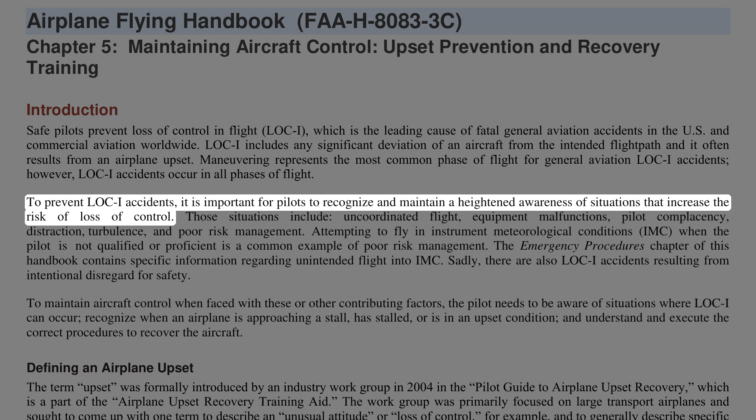To prevent LOCI accidents, it is important for pilots to recognize and maintain a heightened awareness of situations that increase the risk of loss of control. Those situations include uncoordinated flight, equipment malfunctions, pilot complacency, distraction, turbulence, and poor risk management. Attempting to fly in instrument meteorological conditions, IMC, when the pilot is not qualified or proficient is a common example of poor risk management. The Emergency Procedures chapter of this handbook contains specific information regarding unintended flight into IMC. Sadly, there are also LOCI accidents resulting from intentional disregard for safety.

To maintain aircraft control when faced with these or other contributing factors, the pilot needs to be aware of situations where LOCI can occur, recognize when an airplane is approaching a stall, has stalled, or is in an upset condition, and understand and execute the correct procedures to recover the aircraft.

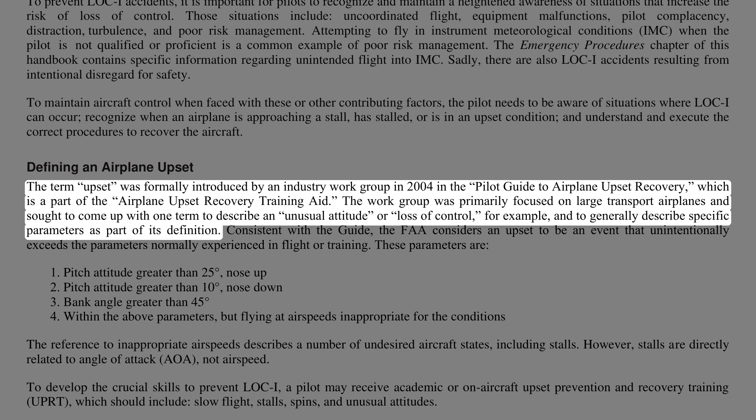Defining an airplane upset. The term upset was formally introduced by an industry workgroup in 2004 in the Pilot Guide to Airplane Upset Recovery, which is part of the Airplane Upset Recovery Training Aid. The workgroup was primarily focused on large transport airplanes and sought to come up with one term to describe an unusual attitude, or loss of control, for example, and to generally describe specific parameters as part of its definition.

Consistent with the guide, the FAA considers an upset to be an event that unintentionally exceeds the parameters normally experienced in flight or training. These parameters are pitch attitude greater than 25 degrees nose up, pitch attitude greater than 10 degrees nose down, bank angle greater than 45 degrees, or within the above parameters but flying at airspeeds inappropriate for the conditions. The reference to inappropriate airspeeds describes a number of undesired aircraft states, including stalls. However, stalls are directly related to angle of attack, AOA, not airspeed.

To develop the crucial skills to prevent LOCI, a pilot may receive academic or on-aircraft upset prevention and recovery training, UPRT, which should include slow flight, stalls, spins, and unusual attitudes. Upset training places considerable emphasis on understanding and preventing an upset, so a pilot avoids such a situation. If an upset does occur, upset training also reinforces proper recovery techniques.

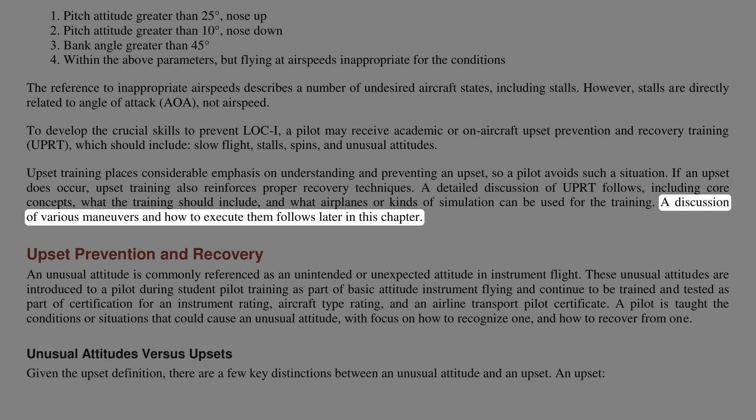A detailed discussion of UPRT follows, including core concepts, what the training should include, and what airplanes or kinds of simulation can be used for the training. A discussion of various maneuvers and how to execute them follows later in this chapter.

Upset prevention and recovery. An unusual attitude is commonly referenced as an unintended or unexpected attitude in instrument flight. These unusual attitudes are introduced to a pilot during student pilot training as part of basic attitude instrument flying and continue to be trained and tested as part of certification for an instrument rating, aircraft type rating, and an airline transport pilot certificate. A pilot is taught the conditions or situations that could cause an unusual attitude, with focus on how to recognize one, and how to recover from one.

Unusual attitudes versus upsets. Given the upset definition, there are a few key distinctions between an unusual attitude and an upset. An upset includes stall events, includes overspeeds or other inappropriate speeds for a given flight condition, and has defined parameters. For example, for training purposes, an instructor could place the aircraft in a 30 degree bank with a nose-up pitch attitude of 15 degrees and ask the student to recover, and that would be considered an unusual attitude, but would not meet the upset parameters.

Unusual attitude training centers on unintentional situations that may lead to a startle effect. For example, during unusual attitude training, the pilot is often directed to close their eyes, and any element of surprise disappears. The top 4 causal and contributing factors that have led to an upset and resulted in LOCI accidents are environmental factors, mechanical factors, human factors, and stall-related factors.

Environmental factors: turbulence, or a large variation in wind velocity over a short distance, can cause upset and LOCI. Maintain awareness of conditions that can lead to various types of turbulence, such as clear air turbulence, mountain waves, wind shear, and thunderstorms or microbursts.

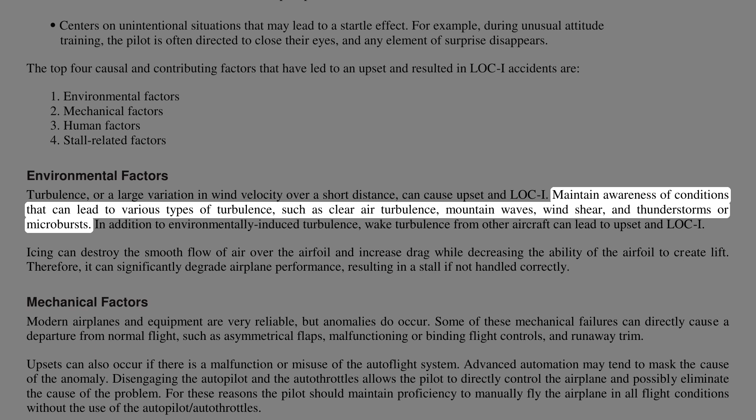In addition to environmentally induced turbulence, wake turbulence from other aircraft can lead to upset and LOCI.

Icing can destroy the smooth flow of air over the airfoil and increase drag while decreasing the ability of the airfoil to create lift. Therefore, it can significantly degrade airplane performance, resulting in a stall if not handled correctly.

Mechanical factors. Modern airplanes and equipment are very reliable, but anomalies do occur. Some of these mechanical failures can directly cause a departure from normal flight, such as asymmetrical flaps, malfunctioning or binding flight controls, and runaway trim.

Upsets can also occur if there is a malfunction or misuse of the autoflight system. Advanced automation may tend to mask the cause of the anomaly. Disengaging the autopilot and the autothrottles allows the pilot to directly control the airplane and possibly eliminate the cause of the problem. For these reasons, the pilot should maintain proficiency to manually fly the airplane in all flight conditions without the use of the autopilot or autothrottles.

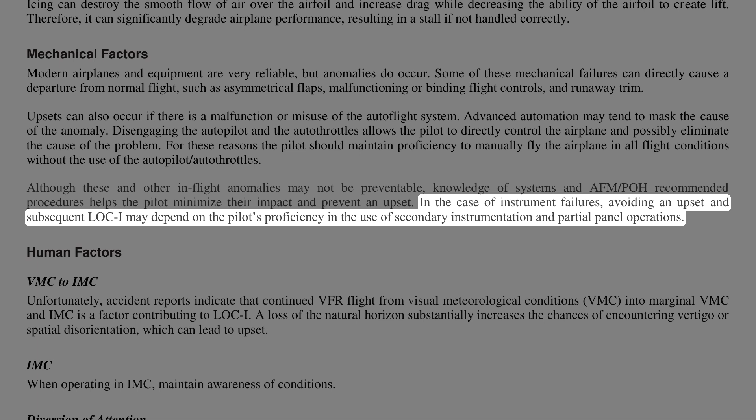Although these and other in-flight anomalies may not be preventable, knowledge of systems and AFM/POH recommended procedures helps the pilot minimize their impact and prevent an upset. In the case of instrument failures, avoiding an upset and subsequent loss of control may depend on the pilot's proficiency in the use of secondary instrumentation and partial panel operations.

Human factors. VMC to IMC. Unfortunately, accident reports indicate that continued VFR flight from visual meteorological conditions, VMC, into marginal VMC and IMC is a factor contributing to loss of control. A loss of the natural horizon substantially increases the chances of encountering vertigo or spatial disorientation, which can lead to upset.

IMC. When operating in IMC, maintain awareness of conditions. Diversion of attention. In addition to its direct impact, an in-flight anomaly or malfunction can also lead to an upset if it diverts the pilot's attention from basic airplane control responsibilities.

Failing to monitor the automated systems, over-reliance on those systems, or incomplete knowledge and experience with those systems can lead to an upset. Diversion of attention can also occur simply from the pilot's efforts to set avionics or navigation equipment while flying the airplane. Task saturation.

The margin of safety is the difference between task requirements and pilot capabilities. An upset and eventual loss of control can occur whenever requirements exceed capabilities. For example, an airplane upset event that requires rolling an airplane from a near inverted to an upright orientation may demand piloting skills beyond those learned during primary training.

In another example, a fatigued pilot who inadvertently encounters IMC at night coupled with a vacuum pump failure, or a pilot who fails to engage pitot heat while flying in IMC, could become disoriented and lose control of the airplane due to the demands of extended and unpracticed partial panel flight.

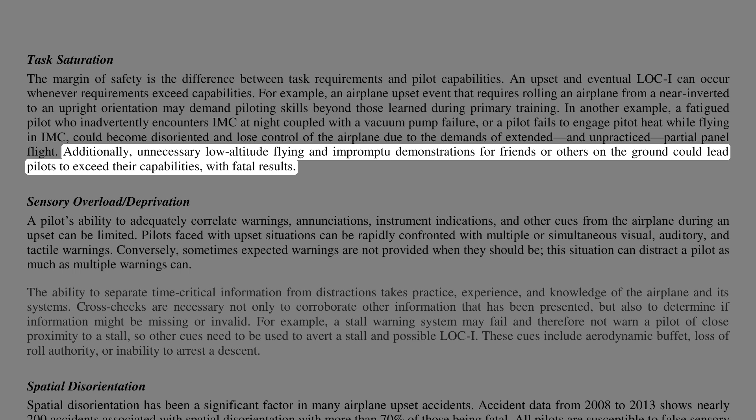Additionally, unnecessary low-altitude flying and impromptu demonstrations for friends or others on the ground could lead pilots to exceed their capabilities, with fatal results. Sensory overload, deprivation.

A pilot's ability to adequately correlate warnings, annunciations, instrument indications, and other cues from the airplane during an upset can be limited. Pilots faced with upset situations can be rapidly confronted with multiple or simultaneous visual, auditory, and tactile warnings. Conversely, sometimes expected warnings are not provided when they should be. This situation can distract a pilot as much as multiple warnings can.

The ability to separate time-critical information from distractions takes practice, experience, and knowledge of the airplane and its systems. Cross-checks are necessary not only to corroborate other information that has been presented, but also to determine if information might be missing or invalid. For example, a stall warning system may fail and therefore not warn a pilot of close proximity to a stall.

So other cues need to be used to avert a stall and possible loss of control. These cues include aerodynamic buffet, loss of roll authority, or inability to arrest a descent.

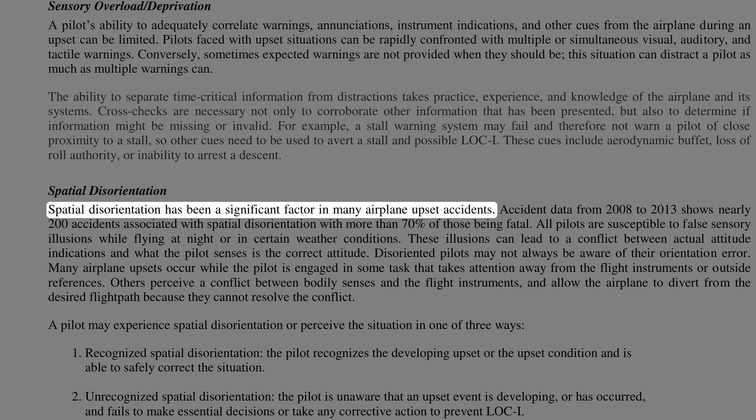Spatial disorientation. Spatial disorientation has been a significant factor in many airplane upset accidents. Accident data from 2008 to 2013 shows nearly 200 accidents associated with spatial disorientation, with more than 70% of those being fatal. All pilots are susceptible to false sensory illusions while flying at night or in certain weather conditions.

These illusions can lead to a conflict between actual attitude indications and what the pilot senses is the correct attitude. Disoriented pilots may not always be aware of their orientation error. Many airplane upsets occur while the pilot is engaged in some task that takes attention away from the flight instruments or outside references. Others perceive a conflict between bodily senses and the flight instruments, and allow the airplane to divert from the desired flight path because they cannot resolve the conflict.

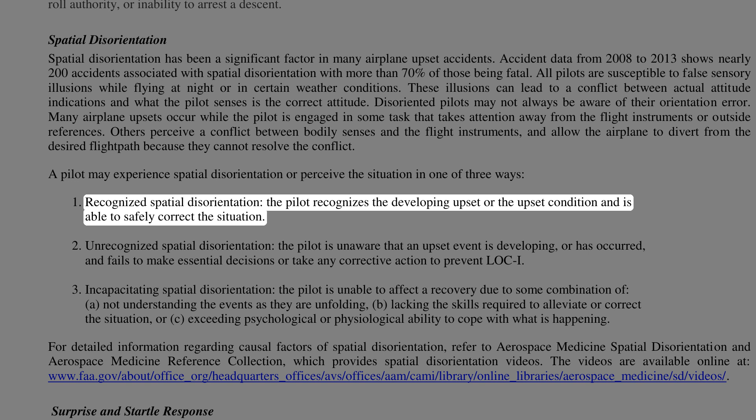A pilot may experience spatial disorientation or perceive the situation in one of three ways. Recognized spatial disorientation: the pilot recognizes the developing upset or the upset condition and is able to safely correct the situation.

Unrecognized spatial disorientation: the pilot is unaware that an upset event is developing or has occurred, and fails to make essential decisions or take any corrective action to prevent loss of control.

Incapacitating spatial disorientation: the pilot is unable to effect a recovery due to some combination of A, not understanding the events as they are unfolding; B, lacking the skills required to alleviate or correct the situation; or C, exceeding psychological or physiological ability to cope with what is happening.

For detailed information regarding causal factors of spatial disorientation, refer to Aerospace Medicine Spatial Disorientation and the Aerospace Medicine Reference Collection, which provides spatial disorientation videos available online.

Surprise and startle response. Surprise is an unexpected event that violates a pilot's expectations and can affect the mental processes used to respond to the event. Startle is an uncontrollable, automatic muscle reflex, raised heart rate, blood pressure, etc., elicited by exposure to a sudden, intense event that violates a pilot's expectations.

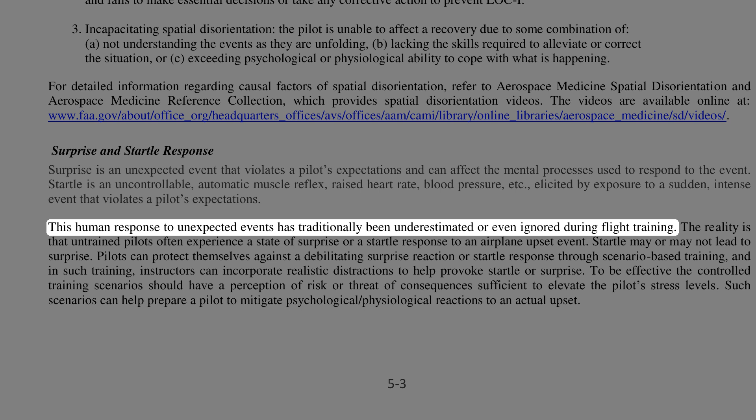This human response to unexpected events has traditionally been underestimated or even ignored during flight training. The reality is that untrained pilots often experience a state of surprise or a startle response to an airplane upset event. Startle may or may not lead to surprise.

Pilots can protect themselves against a debilitating surprise reaction or startle response through scenario-based training, and in such training, instructors can incorporate realistic distractions to help provoke startle or surprise. To be effective, the controlled training scenarios should have a perception of risk or threat of consequences sufficient to elevate the pilot's stress levels. Such scenarios can help prepare a pilot to mitigate psychological and physiological reactions to an actual upset.

Upset prevention and recovery training, UPRT. Upsets are not intentional flight maneuvers, except in maneuver-based training, therefore they are often unexpected.

The reaction of an inexperienced or inadequately trained pilot to an unexpected abnormal flight attitude is usually instinctive rather than intelligent and deliberate. Such a pilot often reacts with abrupt muscular effort, which is without purpose and even hazardous in turbulent conditions, at excessive speeds, or at low altitudes.

Without proper upset recovery training on interpretation and airplane control, the pilot can quickly aggravate an abnormal flight attitude into a potentially fatal loss of control accident.

Consequently, UPRT is intended to focus education and training on the prevention of upsets, and on recovering from these events if they occur. Figure 5-1.

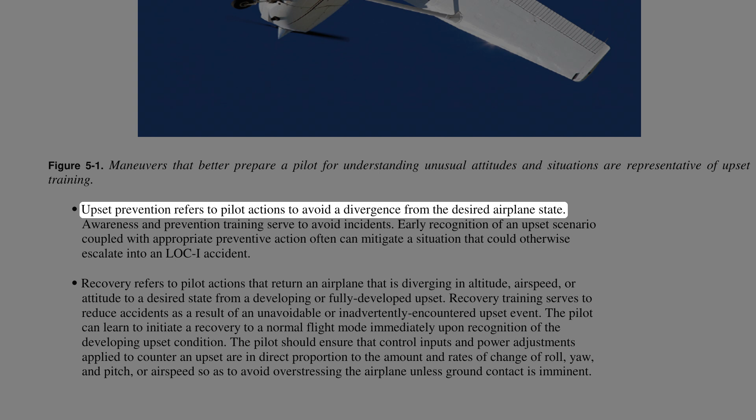Upset prevention refers to pilot actions to avoid a divergence from the desired airplane state. Awareness and prevention training serve to avoid incidents. Early recognition of an upset scenario coupled with appropriate preventive action often can mitigate a situation that could otherwise escalate into an LOC-I accident.

Recovery refers to pilot actions that return an airplane that is diverging in altitude, airspeed, or attitude to a desired state from a developing or fully developed upset. Recovery training serves to reduce accidents as a result of an unavoidable or inadvertently encountered upset event.

The pilot can learn to initiate a recovery to a normal flight mode immediately upon recognition of the developing upset condition. The pilot should ensure that control inputs and power adjustments applied to counter an upset are in direct proportion to the amount and rates of change of roll, yaw, and pitch, or airspeed, so as to avoid overstressing the airplane unless ground contact is imminent.

UPRT training core concepts: airplane upsets are by nature time-critical events. They can also place pilots in unusual and unfamiliar attitudes that sometimes require counterintuitive control movements.

Upsets have the potential to put a pilot into a life-threatening situation compounded by panic, diminished mental capacity, and potentially incapacitating spatial disorientation. Real-world upset situations often provide very little time to react, but exposure to such events during training can reduce surprise and mitigate confusion during an actual unexpected upset.

The goal is to equip the pilot to promptly recognize an escalating threat pattern or sensory overload and quickly identify and correct an impending upset.

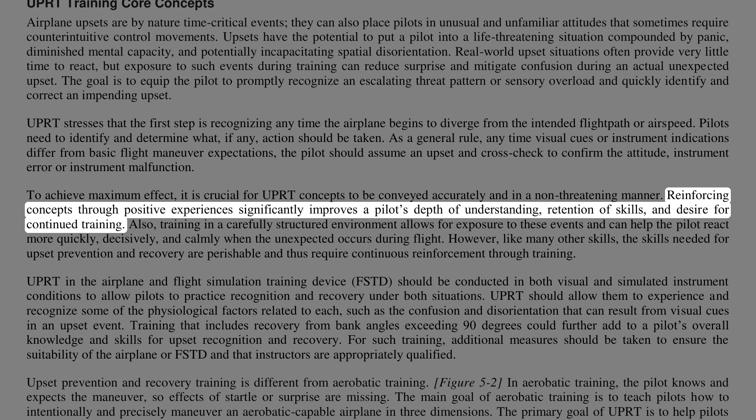Reinforcing concepts through positive experiences significantly improves a pilot's depth of understanding, retention of skills, and desire for continued training. Also, training in a carefully structured environment allows for exposure to these events and can help the pilot react more quickly, decisively, and calmly when the unexpected occurs during flight.

However, like many other skills, the skills needed for upset prevention and recovery are perishable and thus require continuous reinforcement through training. UPRT in the airplane and Flight Simulation Training Device (FSTD) should be conducted in both visual and simulated instrument conditions to allow pilots to practice recognition and recovery under both situations.

UPRT should allow them to experience and recognize some of the physiological factors related to each, such as the confusion and disorientation that can result from visual cues in an upset event. Training that includes recovery from bank angles exceeding 90 degrees could further add to a pilot's overall knowledge and skills for upset recognition and recovery. For such training, additional measures should be taken to ensure the suitability of the airplane or FSTD and that instructors are appropriately qualified. Upset prevention and recovery training is different from aerobatic training.

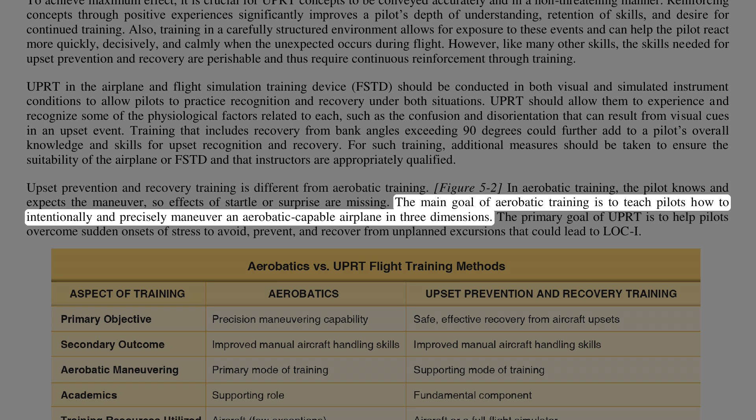Figure 5-2. In aerobatic training, the pilot knows and expects the maneuver, so effects of startle or surprise are missing. The main goal of aerobatic training is to teach pilots how to intentionally and precisely maneuver an aerobatic-capable airplane in 3 dimensions. The primary goal of UPRT is to help pilots overcome sudden onsets of stress to avoid, prevent, and recover from unplanned excursions that could lead to loss of control.

Comprehensive UPRT builds on 3 mutually supportive components: academics, airplane-based training, and, typically at the transport category type rating training level, use of FSTDs. Each has unique benefits and limitations, but when implemented cohesively and comprehensively throughout a pilot's career, the components can offer maximum preparation for upset awareness, prevention, recognition, and recovery.

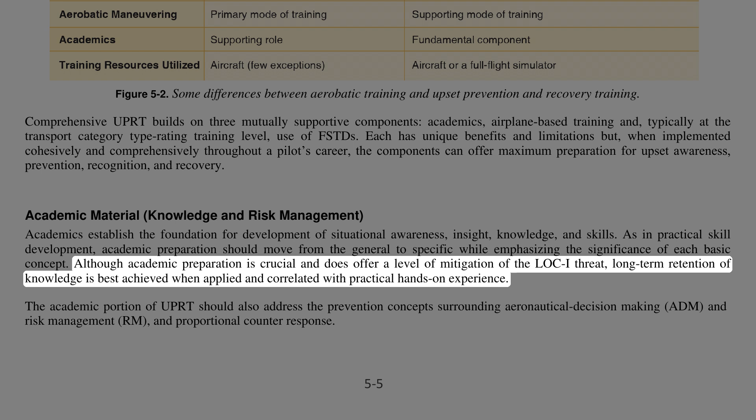Academic material, knowledge and risk management. Academics establish the foundation for development of situational awareness, insight, knowledge, and skills. As in practical skill development, academic preparation should move from the general to specific while emphasizing the significance of each basic concept. Although academic preparation is crucial and does offer a level of mitigation of the loss-of-control threat, long-term retention of knowledge is best achieved when applied and correlated with practical hands-on experience.

The academic portion of UPRT should also address the prevention concepts surrounding aeronautical decision-making, risk management, and proportional counter-response. Prevention through ADM and risk management: this element of prevention routinely occurs on a time scale of minutes or hours, revolving around the concept of effective ADM and risk management through analysis, awareness, resource management, and interrupting the error chain through basic airmanship skills and sound judgment. For instance, imagine a situation in which a pilot assesses conditions at an airport prior to descent and recognizes those conditions as being too severe to safely land the airplane.

Using situational awareness to avert a potentially threatening flight condition is an example of prevention of a loss-of-control situation through effective risk management. Pilots should evaluate the circumstances for each flight, including the equipment and environment, looking specifically for scenarios that may require a higher level of risk management. These include situations that could result in low-altitude maneuvering, steep turns in the pattern, uncoordinated flight, or increased load factors.

Another part of ADM is crew resource management (CRM), or single pilot resource management (SRM). Both are relevant to the UPRT environment. When available, a coordinated crew response to potential and developing upsets can provide added benefits such as increased situational awareness, mutual support, and an improved margin of safety. Since an untrained crew member can be the most unpredictable element in an upset scenario, initial UPRT for crew operations should be mastered individually before being integrated into a multi-crew CRM environment.

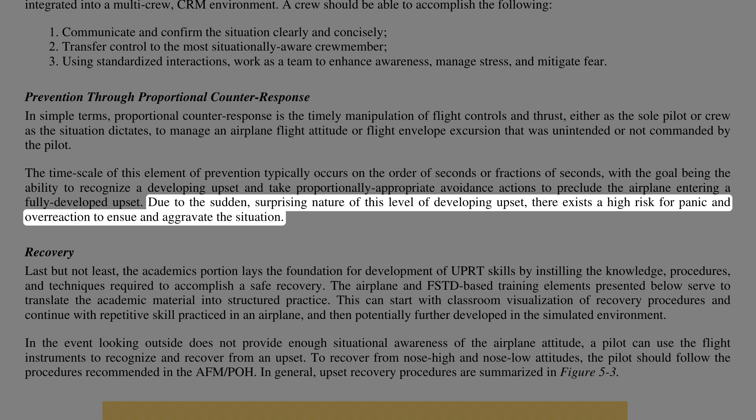Recovery. Last but not least, the academics portion lays the foundation for development of UPRT skills by instilling the knowledge, procedures, and techniques required to accomplish a safe recovery. The airplane and FSTD-based training elements presented below serve to translate the academic material into structured practice.

This can start with classroom visualization of recovery procedures and continue with repetitive skill practiced in an airplane, and then potentially further developed in the simulated environment. In the event looking outside does not provide enough situational awareness of the airplane attitude, a pilot can use the flight instruments to recognize and recover from an upset.

To recover from nose-high and nose-low attitudes, the pilot should follow the procedures recommended in the AFM POH. In general, upset recovery procedures are summarized in Figure 5-3.

Common errors associated with upset recoveries include: incorrect assessment of what kind of upset the airplane is in, failure to disconnect the wing leveler or autopilot, failure to unload the airplane if necessary, failure to roll in the correct direction, and inappropriate management of the airspeed during the recovery. Roles of FSTDs and airplanes in UPRT.

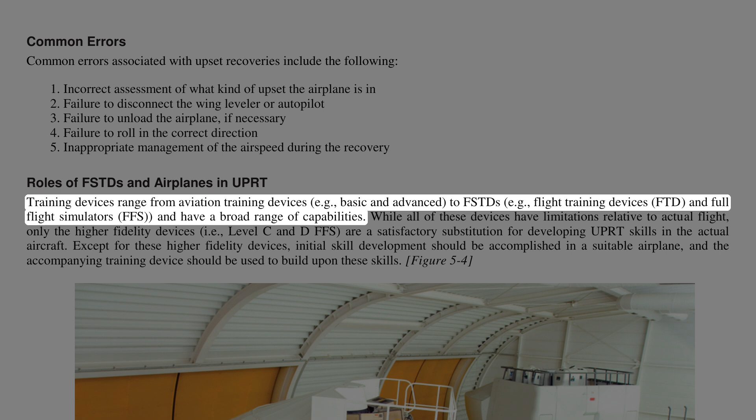Training devices range from aviation training devices, e.g., basic and advanced, to FSTDs, e.g., flight training devices (FTD) and full flight simulators (FFS), and have a broad range of capabilities. While all of these devices have limitations relative to actual flight, only the higher fidelity devices, i.e., Level C and D FFS, are a satisfactory substitution for developing UPRT skills in the actual aircraft.

Except for these higher fidelity devices, initial skill development should be accomplished in a suitable airplane, and the accompanying training device should be used to build upon these skills.

Figure 5-4, Airplane-based UPRT. Ultimately, the more realistic the training scenario, the more indelible the learning experience. Although creating a visual scene of a 110 degree banked attitude with the nose 30 degrees below the horizon may not be technically difficult in a modern simulator, the learning achieved while viewing that scene from the security of the simulator is not as complete as when viewing the same scene in an airplane.

Maximum learning is achieved when the pilot is placed in the controlled, yet adrenaline-enhanced, environment of upsets experienced while in flight. For these reasons, airplane-based UPRT improves a pilot's ability to overcome fear in an airplane upset event.

However, airplane-based UPRT does have limitations. The level of upset training possible may be limited by the maneuvers approved for the particular airplane, as well as by the flight instructor's own UPRT capabilities.

For instance, UPRT conducted in the normal category by a typical flight instructor will necessarily be different from UPRT conducted in the aerobatic category by a flight instructor with expertise in aerobatics.

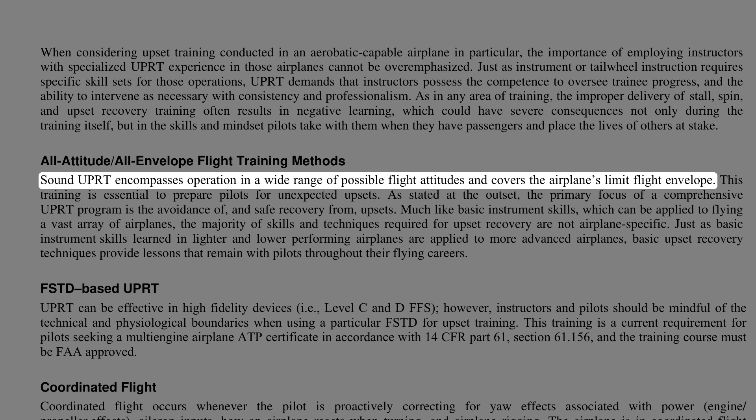All attitude, all envelope flight training methods. Sound UPRT encompasses operation in a wide range of possible flight attitudes and covers the airplane's limit flight envelope. This training is essential to prepare pilots for unexpected upsets.

As stated at the outset, the primary focus of a comprehensive UPRT program is the avoidance of, and safe recovery from, upsets. Much like basic instrument skills, which can be applied to flying a vast array of airplanes, the majority of skills and techniques required for upset recovery are not airplane-specific.

Just as basic instrument skills learned in lighter and lower-performing airplanes are applied to more advanced airplanes, basic upset recovery techniques provide lessons that remain with pilots throughout their flying careers.

FSTD-based UPRT. UPRT can be effective in high-fidelity devices, i.e., Level C and D FFS. However, instructors and pilots should be mindful of the technical and physiological boundaries when using a particular FSTD for upset training.

This training is a current requirement for pilots seeking a multi-engine airplane ATP certificate in accordance with 14 CFR Part 61, Section 61.156, and the training course must be FAA approved.

Coordinated flight occurs whenever the pilot is proactively correcting for yaw effects associated with power, engine, and propeller effects, aileron inputs, how an airplane reacts when turning, and airplane rigging.

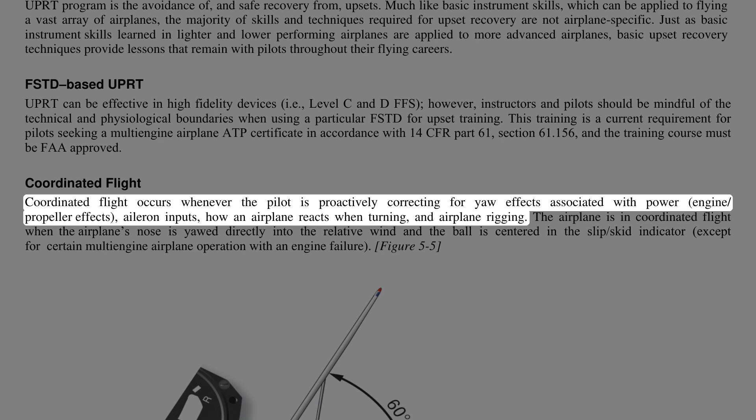The airplane is in coordinated flight when the airplane's nose is yawed directly into the relative wind and the ball is centered in the slip/skid indicator, except for certain multi-engine airplane operations with an engine failure.

Figure 5-5, Angle of Attack. The angle of attack, AOA, is the angle at which the chord of the wing meets the relative wind. The chord is a straight line from the leading edge to the trailing edge.

At low angles of attack, the airflow over the top of the wing flows smoothly and produces lift with a relatively small amount of drag. As the AOA increases, lift as well as drag increases.

However, above a wing's critical AOA, the flow of air separates from the upper surface and backfills, burbles, and eddies, which reduces lift and increases drag. This condition is a stall, which can lead to loss of control if the AOA is not reduced.

It is important for the pilot to understand that a stall is the result of exceeding the critical AOA, not of insufficient airspeed. The term stalling speed can be misleading, as this speed is often discussed when assuming 1G flight at a particular weight and configuration.

Increased load factor directly affects stall speed, as well as do other factors such as gross weight, center of gravity, and flap setting. Therefore, it is possible to stall the wing at any airspeed, at any flight attitude, and at any power setting. For example, if a pilot maintains airspeed and rolls into a coordinated, level 60 degree banked turn,

the load factor is 2G, and the airplane will stall at a speed that is 41% higher than the 1G stall speed. In that 2G level turn, the pilot has to increase AOA to increase the lift required to maintain altitude. At this condition, the pilot is closer to the critical AOA than during level flight and therefore closer to the higher stalling speed.

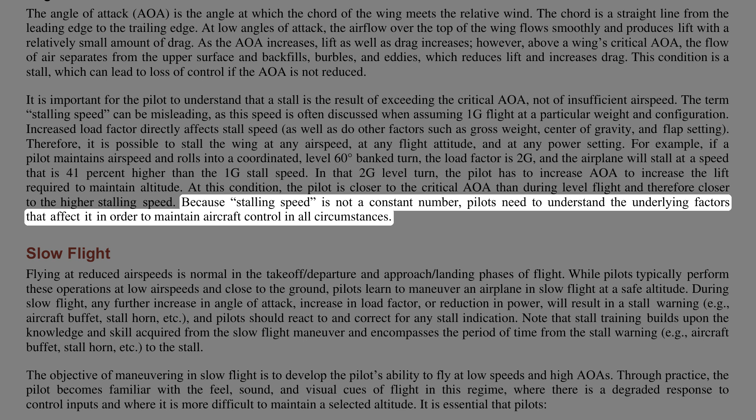Slow flight. Flying at reduced airspeeds is normal in the takeoff, departure and approach, landing phases of flight. While pilots typically perform these operations at low airspeeds and close to the ground, pilots learn to maneuver an airplane in slow flight at a safe altitude.

During slow flight, any further increase in angle of attack, increase in load factor, or reduction in power will result in a stall warning, e.g., aircraft buffet, stall horn, etc. And pilots should react to and correct for any stall indication.

Note that stall training builds upon the knowledge and skill acquired from the slow flight maneuver and encompasses the period of time from the stall warning, e.g., aircraft buffet, stall horn, etc., to the stall. The objective of maneuvering in slow flight is to develop the pilot's ability to fly at low speeds and high AOAs.

Through practice, the pilot becomes familiar with the feel, sound, and visual cues of flight in this regime, where there is a degraded response to control inputs and where it is more difficult to maintain a selected altitude.

It is essential that pilots understand the aerodynamics associated with slow flight in various aircraft configurations and attitudes,

recognize airplane cues in these flight conditions, smoothly manage coordinated flight control inputs while maneuvering without a stall warning, and make prompt appropriate correction should a stall warning occur.

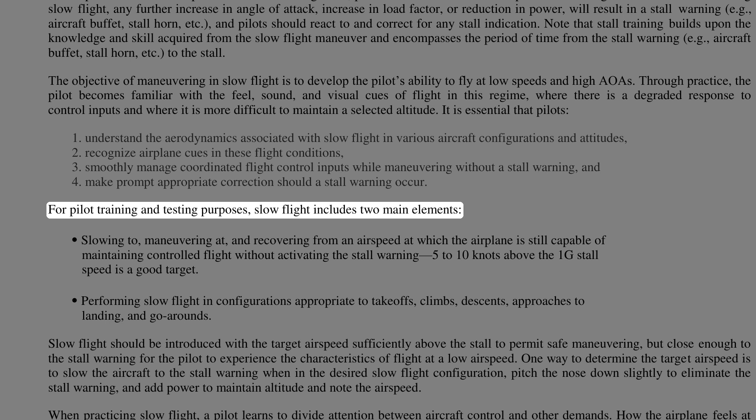For pilot training and testing purposes, slow flight includes two main elements: slowing to, maneuvering at, and recovering from an airspeed at which the airplane is still capable of maintaining controlled flight without activating the stall warning. 5 to 10 knots above the 1G stall speed is a good target.

Performing slow flight in configurations appropriate to takeoffs, climbs, descents, approaches to landing, and go-arounds. Slow flight should be introduced with the target airspeed sufficiently above the stall to permit safe maneuvering, but close enough to the stall warning for the pilot to experience the characteristics of flight at a low airspeed.

One way to determine the target airspeed is to slow the aircraft to the stall warning when in the desired slow flight configuration, pitch the nose down slightly to eliminate the stall warning, and add power to maintain altitude and note the airspeed. When practicing slow flight, a pilot learns to divide attention between aircraft control and other demands.

How the airplane feels at the slower airspeeds demonstrates that as airspeed decreases, control effectiveness decreases. For instance, reducing airspeed from 30 knots to 20 knots above the stalling speed will result in a certain loss of effectiveness of flight control inputs because of less airflow over the control surfaces.

As airspeed is further reduced, the control effectiveness is further reduced, and the reduced airflow over the control surfaces results in larger control movements being required to create the same response. Pilots sometimes refer to the feel of this reduced effectiveness as sloppy or mushy controls.

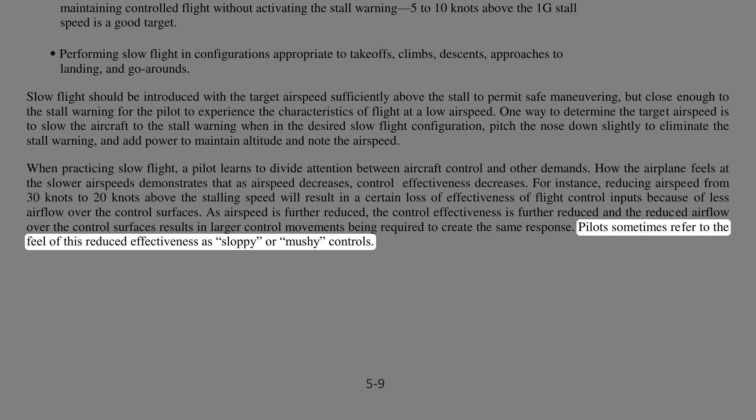When flying above the minimum drag speed, LD max, more power is required to fly even faster. When flying at speeds below LD max, more power is required to fly even slower. Since slow flight will be performed well below LD max, the pilot should be aware that large power inputs or a reduction in AOA will be required to prevent the aircraft from decelerating.

It is important to note that when flying below LD max, or on the backside of the power curve, as the AOA increases toward the critical AOA and the airplane's speed continues to decrease, small changes in pitch control result in disproportionately large changes in induced drag and therefore changes in airspeed. As a result, pitch becomes a more effective control of airspeed when flying below LD max, and power is an effective control of the flight path.

It is also important to note that an airplane flying below LD max exhibits a characteristic known as speed instability, and the airspeed will continue to decay without appropriate pilot action. For example, if the airplane is disturbed by turbulence and the airspeed decreases, the airspeed may continue to decrease without the appropriate pilot action of reducing the AOA or adding power.

Performing the slow flight maneuver. Slow flight training includes slowing the airplane smoothly and promptly from cruising to approach speeds without changes in altitude or heading, while increasing the angle of attack and setting the required power and trim.

Configuration changes, such as extending the landing gear and adding flaps, while maintaining heading and altitude. Turning while maintaining altitude, straight ahead climbs and climbing medium banked, approximately 20 degree turns, and straight ahead power-off gliding descents and descending turns, which represent the takeoff and landing phases of flight.

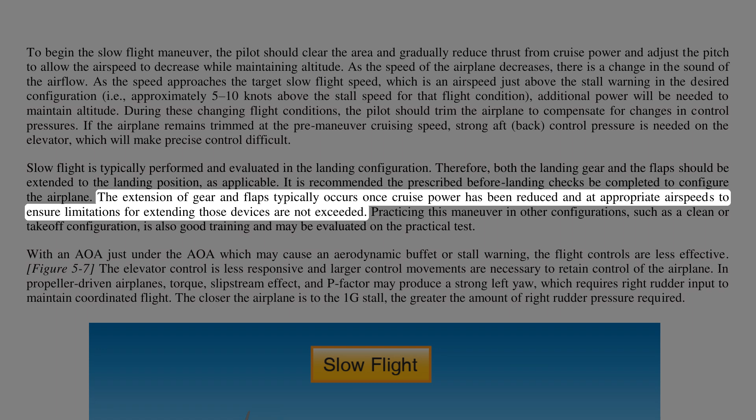Slow flight is typically performed and evaluated in the landing configuration. Therefore, both the landing gear and the flaps should be extended to the landing position, as applicable. It is recommended the prescribed before landing checks be completed to configure the airplane. The extension of gear and flaps typically occurs once cruise power has been reduced and at appropriate airspeeds to ensure limitations for extending those devices are not exceeded.

Practicing this maneuver in other configurations, such as a clean or takeoff configuration, is also good training and may be evaluated on the practical test.

With an AOA just under the AOA which may cause an aerodynamic buffet or stall warning, the flight controls are less effective. Figure 5-7. The elevator control is less responsive and larger control movements are necessary to retain control of the airplane.

In propeller-driven airplanes, torque, slipstream effect, and P-factor may produce a strong left yaw, which requires right rudder input to maintain coordinated flight. The closer the airplane is to the 1G stall, the greater the amount of right rudder pressure required.

Maneuvering in slow flight. When the desired pitch attitude and airspeed have been established in straight and level slow flight, the pilot needs to maintain awareness of outside references and continually cross-check the airplane's instruments to maintain control.

The pilot should note the feel of the flight controls, especially the airspeed changes caused by small pitch adjustments, and the altitude changes caused by power changes. The pilot should practice turns to determine the airplane's controllability characteristics at this low speed. During the turns, it will be necessary to increase power to maintain altitude.

Abrupt or rough control movements during slow flight may result in a stall. For instance, abruptly raising the flaps while in slow flight can cause the plane to stall.

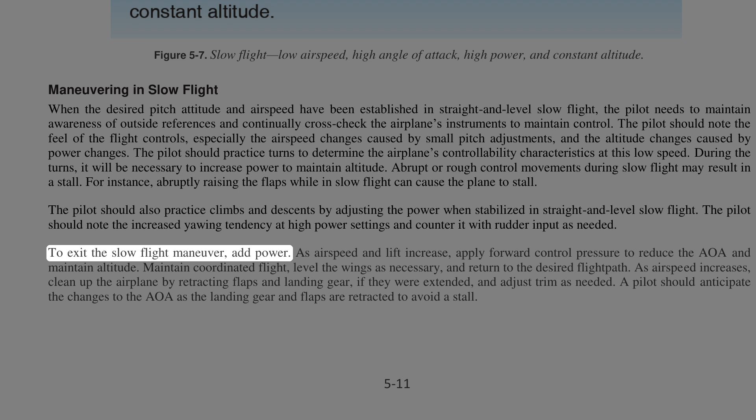As airspeed and lift increase, apply forward control pressure to reduce the AOA and maintain altitude. Maintain coordinated flight, level the wings as necessary, and return to the desired flight path. As airspeed increases, clean up the airplane by retracting flaps and landing gear, if they were extended, and adjust trim

as needed. A pilot should anticipate the changes to the AOA as the landing gear and flaps are retracted to avoid a stall.

Common errors in the performance of slow flight are: failure to adequately clear the area, inadequate back elevator pressure as power is reduced, resulting in altitude loss; excessive back elevator pressure as power is reduced, resulting in a climb followed by rapid reduction in airspeed; insufficient right rudder to compensate for left yaw; fixation on the flight instruments; failure to anticipate changes in AOA as flaps are extended or retracted; inadequate power management; inability to adequately divide attention between airplane control and orientation; failure to properly trim the airplane; failure to respond to a stall warning.

Stalls. A stall is an aerodynamic condition which occurs when smooth airflow over the airplane's wings is disrupted, resulting in loss of lift. Specifically, a stall occurs when the AOA, the angle between the chord line of the wing and the relative wind, exceeds the wing's critical AOA.

It is possible to exceed the critical AOA at any airspeed, at any attitude, and at any power setting. For these reasons, it is important to understand factors and situations that can lead to a stall, and develop proficiency in stall recognition and recovery.

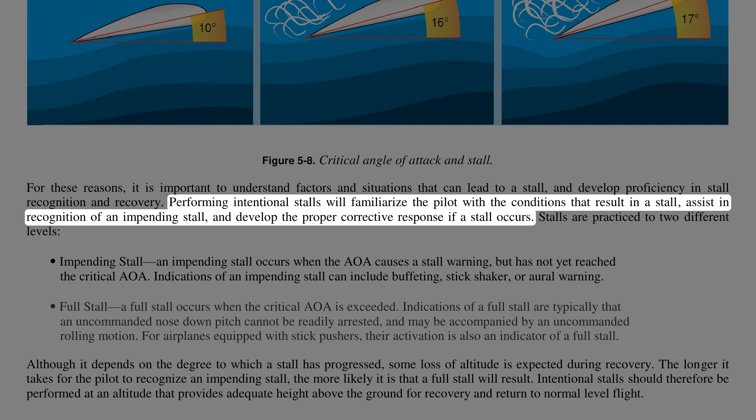Performing intentional stalls will familiarize the pilot with the conditions that result in a stall, assist in recognition of an impending stall, and develop the proper corrective response if a stall occurs. Stalls are practiced to two different levels.

Impending stall. An impending stall occurs when the AOA causes a stall warning, but has not yet reached the critical AOA. Indications of an impending stall can include buffeting, stick shaker, or aural warning.

Full stall. A full stall occurs when the critical AOA is exceeded. Indications of a full stall are typically that an uncommanded nose-down pitch cannot be readily arrested, and may be accompanied by an uncommanded rolling motion. For airplanes equipped with stick pushers, their activation is also an indicator of a full stall.

Although it depends on the degree to which a stall has progressed, some loss of altitude is expected during recovery. The longer it takes for the pilot to recognize an impending stall, the more likely it is that a full stall will result. Intentional stalls should therefore be performed at an altitude that provides adequate height above the ground for recovery and return to normal level flight.

Stall recognition. A pilot should recognize the flight conditions that are conducive to stalls and know how to apply the necessary corrective action. This level of proficiency involves learning to recognize an impending stall by sight, sound, and feel.

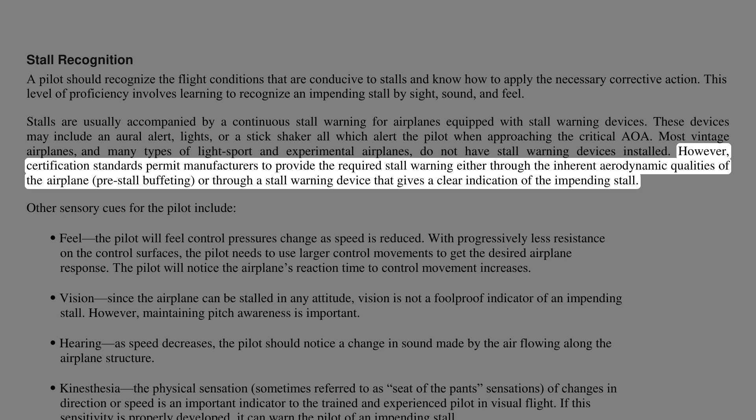Stalls are usually accompanied by a continuous stall warning for airplanes equipped with stall warning devices. These devices may include an aural alert, lights, or a stick shaker, all of which alert the pilot when approaching the critical AOA. Most vintage airplanes, and many types of light sport and experimental airplanes, do not have stall warning devices installed. However, certification standards permit manufacturers to provide the required stall warning either through the inherent aerodynamic qualities of the airplane, pre-stall buffeting, or through a stall warning device that gives a clear indication of the impending stall.

Other sensory cues for the pilot include feel. The pilot will feel control pressures change as speed is reduced. With progressively less resistance on the control surfaces, the pilot needs to use larger control movements to get the desired airplane response. The pilot will notice the airplane's reaction time to control movement increases.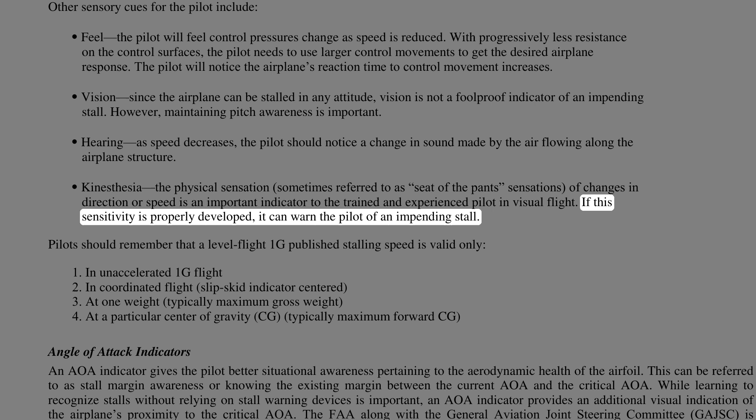Vision. Since the airplane can be stalled in any attitude, vision is not a foolproof indicator of an impending stall. However, maintaining pitch awareness is important. Hearing. As speed decreases, the pilot should notice a change in sound made by the air flowing along the airplane structure. Kinesthesia. The physical sensation, sometimes referred to as seat of the pants sensations of changes in direction or speed, is an important indicator to the trained and experienced pilot in visual flight. If this sensitivity is properly developed, it can warn the pilot of an impending stall.

Pilots should remember that a level flight 1G published stalling speed is valid only in unaccelerated 1G flight, in coordinated flight, with the slip skid indicator centered, at one weight (typically maximum gross weight), at a particular center of gravity, CG (typically maximum forward CG).

Angle of attack indicators. An AOA indicator gives the pilot better situational awareness pertaining to the aerodynamic health of the airfoil. This can be referred to as stall margin awareness, or knowing the existing margin between the current AOA and the critical AOA.

While learning to recognize stalls without relying on stall warning devices is important, an AOA indicator provides an additional visual indication of the airplane's proximity to the critical AOA. The FAA, along with the General Aviation Joint Steering Committee (GAJSC), is promoting the use of angle of attack indicators to reduce the occurrence of loss of control in flight.

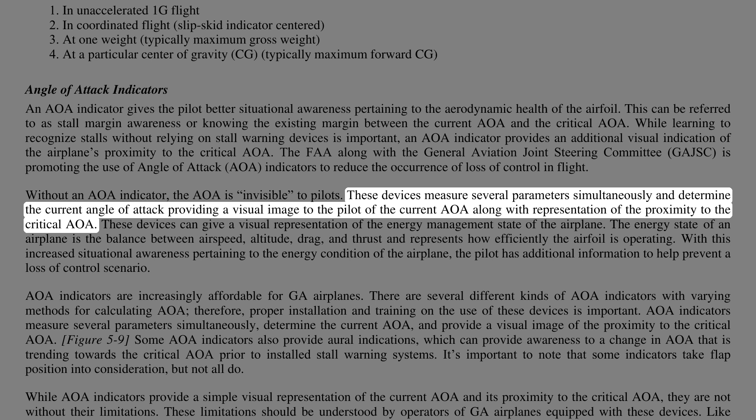Without an AOA indicator, the AOA is invisible to pilots. These devices measure several parameters simultaneously and determine the current angle of attack, providing a visual image to the pilot of the current AOA along with representation of the proximity to the critical AOA. These devices can give a visual representation of the energy management state of the airplane.

The energy state of an airplane is the balance between airspeed, altitude, drag, and thrust, and represents how efficiently the airfoil is operating. With this increased situational awareness pertaining to the energy condition of the airplane, the pilot has additional information to help prevent a loss of control scenario.

AOA indicators are increasingly affordable for GA airplanes. There are several different kinds of AOA indicators with varying methods for calculating AOA. Therefore, proper installation and training on the use of these devices is important.

AOA indicators measure several parameters simultaneously, determine the current AOA, and provide a visual image of the proximity to the critical AOA (Figure 5-9). Some AOA indicators also provide aural indications, which can provide awareness to a change in AOA that is trending towards the critical AOA prior to installed stall warning systems.

It's important to note that some indicators take flap position into consideration, but not all do. While AOA indicators provide a simple visual representation of the current AOA and its proximity to the critical AOA, they are not without their limitations. These limitations should be understood by operators of GA airplanes equipped with these devices.

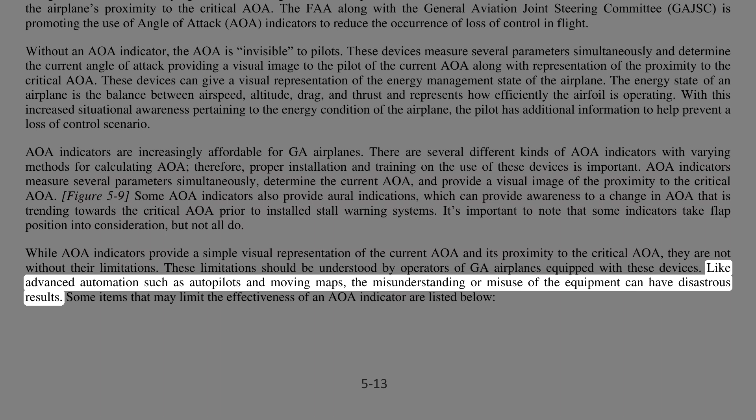Like advanced automation such as autopilots and moving maps, the misunderstanding or misuse of the equipment can have disastrous results. Some items that may limit the effectiveness of an AOA indicator are listed below: calibration techniques, probes or vanes not being heated, the type of indicator itself, flap setting, and wing contamination.

Installation of AOA indicators not required by type certification in GA airplanes has been streamlined by the FAA. The FAA established policy in February 2014 pertaining to non-required AOA systems and how they may be installed as a minor alteration, depending upon their installation requirements and operational utilization, and the procedures to follow for certification of these installations. For updated information on this, please reference the FAA website.

If airplane equipment includes an angle of attack indicator, the pilot should know how the particular device determines AOA, what the display indicates, and the appropriate response to any indication. Pilots are encouraged to conduct in-flight training to see the indications throughout various maneuvers, such as slow flight, stalls, takeoffs, and landings, and to practice the appropriate responses to those indications.

It is also important to note that some items may limit the effectiveness of an AOA indicator, e.g., calibration techniques, wing contamination, unheated probes and vanes. Pilots flying an airplane equipped with an AOA indicator should refer to the pilot handbook information or contact the manufacturer for specific limitations applicable to that indicator type.

Ground and flight instructors should make every attempt to receive training from an instructor knowledgeable about AOA indicators prior to giving instruction pertaining to or in airplanes equipped with an AOA indicator. Pilot schools should incorporate training on AOA indicators in their syllabi whether their training aircraft are equipped with them or not.

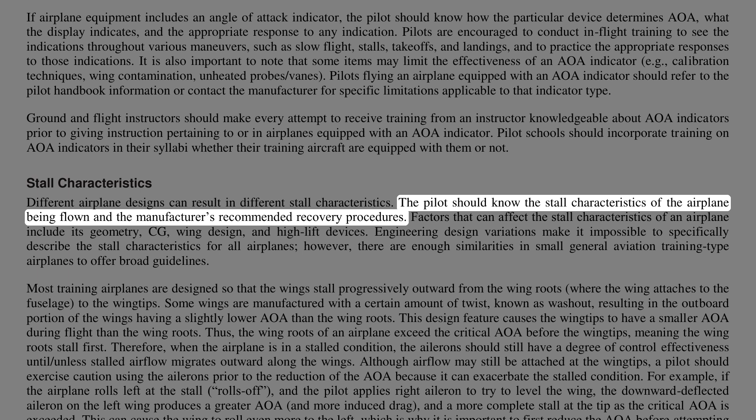Stall characteristics. Different airplane designs can result in different stall characteristics. The pilot should know the stall characteristics of the airplane being flown and the manufacturer's recommended recovery procedures. Factors that can affect the stall characteristics of an airplane include its geometry, CG, wing design, and high lift devices.

Engineering design variations make it impossible to specifically describe the stall characteristics for all airplanes. However, there are enough similarities in small general aviation training type airplanes to offer broad guidelines. Most training airplanes are designed so that the wings stall progressively outward from the wing roots, where the wing attaches to the fuselage, to the wingtips.

Some wings are manufactured with a certain amount of twist, known as washout, resulting in the outboard portion of the wings having a slightly lower angle of attack than the wing roots. This design feature causes the wingtips to have a smaller AOA during flight than the wing roots. Thus, the wing roots of an airplane exceed the critical AOA before the wingtips, meaning the wing roots stall first.

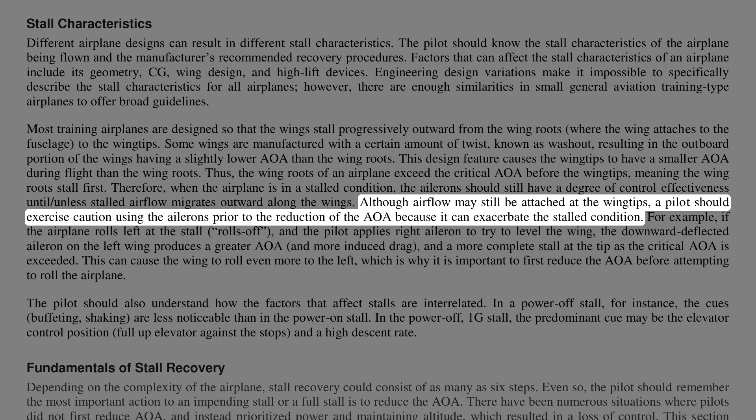Therefore, when the airplane is in a stalled condition, the ailerons should still have a degree of control effectiveness, unless stalled airflow migrates outward along the wings. Although airflow may still be attached at the wingtips, a pilot should exercise caution using the ailerons prior to the reduction of the AOA, because it can exacerbate the stalled condition.

For example, if the airplane rolls left at the stall, and the pilot applies right aileron to try to level the wing, the downward deflected aileron on the left wing produces a greater AOA, and more induced drag, and a more complete stall at the tip as the critical AOA is exceeded. This can cause the wing to roll even more to the left, which is why it is important to first reduce the AOA before attempting to roll the airplane.

The pilot should also understand how the factors that affect stalls are interrelated. In a power-off stall, for instance, the cues—buffeting, shaking—are less noticeable than in the power-on stall. In the power-off, 1G stall, the predominant cue may be the elevator control position, full-up elevator against the stops, and a high descent rate.

Fundamentals of stall recovery. Depending on the complexity of the airplane, stall recovery could consist of as many as six steps. Even so, the pilot should remember the most important action to an impending stall or a full stall is to reduce the AOA. There have been numerous situations where pilots did not first reduce AOA, and instead prioritized power and maintaining altitude, which resulted in a loss of control.

This section provides a generic stall recovery procedure for light general aviation aircraft, adapted from a template developed by major airplane manufacturers, and can be adjusted appropriately for the aircraft used. Figure 5-10. However, a pilot should always follow the aircraft-specific manufacturer's recommended procedures if published and current. The recovery actions should be made in a procedural manner, summarized in Figure 5-10. The following discussion explains each of the six steps.

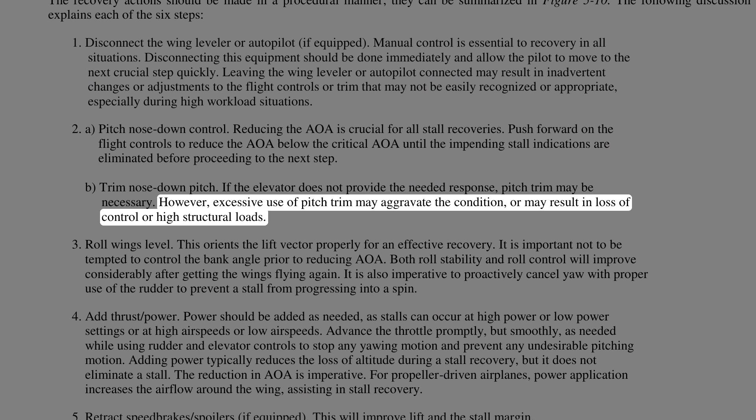Trim nose down pitch. If the elevator does not provide the needed response, pitch trim may be necessary. However, excessive use of pitch trim may aggravate the condition, or may result in loss of control or high structural loads. Roll wings level. This orients the lift vector properly for an effective recovery.

It is important not to be tempted to control the bank angle prior to reducing AOA. Both roll stability and roll control will improve considerably after getting the wings flying again. It is also imperative to proactively cancel yaw with proper use of the rudder to prevent a stall from progressing into a spin.

Add thrust, power. Power should be added as needed, as stalls can occur at high power or low power settings, or at high airspeeds or low airspeeds. Advance the throttle promptly, but smoothly, as needed while using rudder and elevator controls to stop any yawing motion and prevent any undesirable pitching motion. Adding power typically reduces the loss of altitude during a stall recovery, but it does not eliminate a stall. The reduction in AOA is imperative. For propeller-driven airplanes, power application increases the airflow around the wing, assisting in stall recovery.

Retract speed brakes or spoilers, if equipped. This will improve lift and the stall margin.

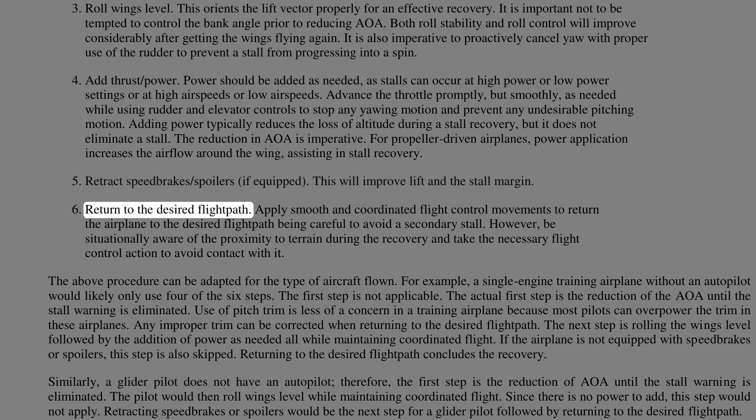Return to the desired flight path. Apply smooth and coordinated flight control movements to return the airplane to the desired flight path, being careful to avoid a secondary stall. However, be situationally aware of the proximity to terrain during the recovery and take the necessary flight control action to avoid contact with it. The above procedure can be adapted for the type of aircraft flown.

For example, a single-engine training airplane without an autopilot would likely only use 4 of the 6 steps. The first step is not applicable. The actual first step is the reduction of AOA until the stall warning is eliminated. Use of pitch trim is less of a concern in a training airplane because most pilots can overpower the trim in these airplanes. Any improper trim can be corrected when returning to the desired flight path. The next step is rolling the wings level, followed by the addition of power as needed, all while maintaining coordinated flight. If the airplane is not equipped with speed brakes or spoilers, this step is also skipped. Returning to the desired flight path concludes the recovery.

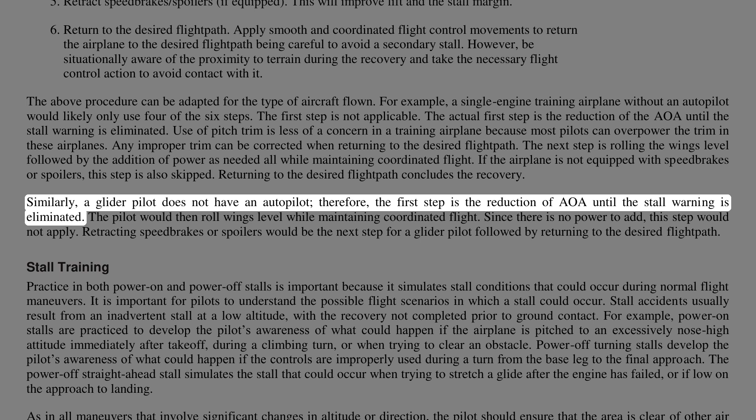Similarly, a glider pilot does not have an autopilot. Therefore, the first step is the reduction of AOA until the stall warning is eliminated. The pilot would then roll wings level while maintaining coordinated flight. Since there is no power to add, this step would not apply. Retracting speed brakes or spoilers would be the next step for a glider pilot, followed by returning to the desired flight path.

Stall training. Practice in both power-on and power-off stalls is important because it simulates stall conditions that could occur during normal flight maneuvers. It is important for pilots to understand the possible flight scenarios in which a stall could occur. Stall accidents usually result from an inadvertent stall at a low altitude, with the recovery not completed prior to ground contact. For example, power-on stalls are practiced to develop the pilot's awareness of what could happen if the airplane is pitched to an excessively nose-high attitude immediately after takeoff, during a climbing turn, or when trying to clear an obstacle.

Power-off turning stalls develop the pilot's awareness of what could happen if the controls are improperly used during a turn from the base leg to the final approach. The power-off straight-ahead stall simulates the stall that could occur when trying to stretch a glide after the engine has failed, or if low on the approach to landing.

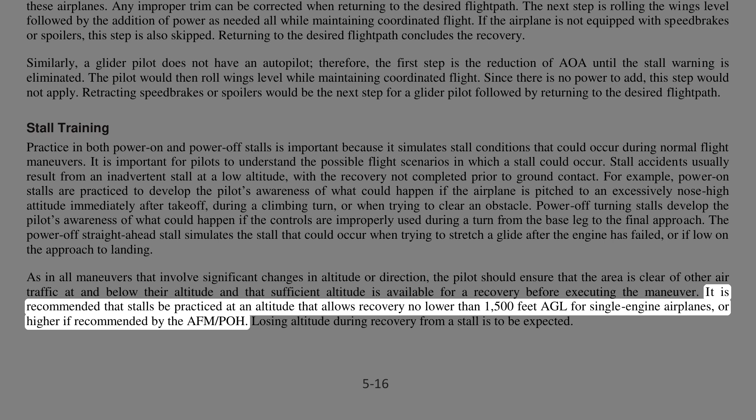As in all maneuvers that involve significant changes in altitude or direction, the pilot should ensure that the area is clear of other air traffic at and below their altitude, and that sufficient altitude is available for a recovery before executing the maneuver. It is recommended that stalls be practiced at an altitude that allows recovery no lower than 1,500 feet AGL for single-engine airplanes, or higher if recommended by the AFM/POH. Losing altitude during recovery from a stall is to be expected.

Approaches to stalls, impending stalls, power on or power off. An impending stall occurs when the airplane is approaching, but does not exceed, the critical AOA. The purpose of practicing impending stalls is to learn to retain or regain full control of the airplane immediately upon recognizing that it is nearing a stall, or that a stall is likely to occur if the pilot does not take appropriate action.

Pilot training should emphasize teaching the same recovery technique for impending stalls and full stalls. The practice of impending stalls is of particular value in developing the pilot's sense of feel for executing maneuvers in which maximum airplane performance is required. These maneuvers require flight in which the airplane approaches a stall, but the pilot initiates recovery at the first indication, such as by a stall warning device activation.

Impending stalls may be entered and performed in the same attitudes and configurations as the full stalls or other maneuvers described in this chapter. However, instead of allowing the airplane to reach the critical AOA, the pilot should immediately reduce AOA once the stall warning device goes off, if installed, or recognizes other cues such as buffeting. The pilot should hold the nose-down control input as required to eliminate the stall warning, then level the wings, maintain coordinated flight, and then apply whatever additional power is necessary to return to the desired flight path. The pilot will have recovered once the airplane has returned to the desired flight path with sufficient airspeed and adequate flight control effectiveness and no stall warning.

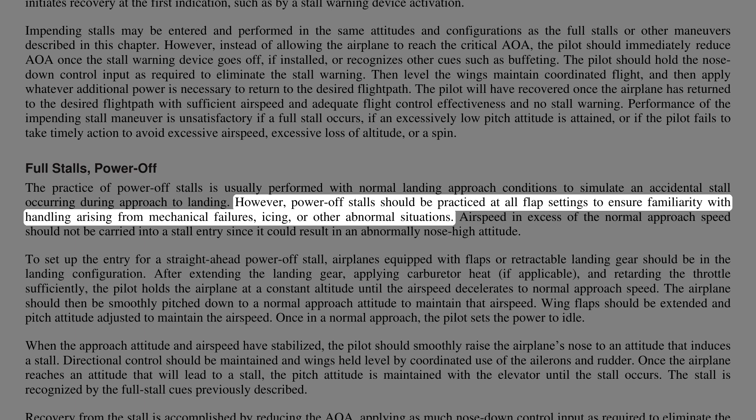The practice of power-off stalls is usually performed with normal landing approach conditions to simulate an accidental stall occurring during approach to landing. However, power-off stalls should be practiced at all flap settings to ensure familiarity with handling arising from mechanical failures, icing, or other abnormal situations. Airspeed in excess of the normal approach speed should not be carried into a stall entry since it could result in an abnormally nose-high attitude.

To set up the entry for a straight-ahead power-off stall, airplanes equipped with flaps or retractable landing gear should be in the landing configuration. After extending the landing gear, applying carburetor heat if applicable, and retarding the throttle sufficiently, the pilot holds the airplane at a constant altitude until the airspeed decelerates to normal approach speed. The airplane should then be smoothly pitched down to a normal approach attitude to maintain that airspeed. Wing flaps should be extended and pitch attitude adjusted to maintain the airspeed.

Once in a normal approach, the pilot sets the power to idle. When the approach attitude and airspeed have stabilized, the pilot should smoothly raise the airplane's nose to an attitude that induces a stall. Directional control should be maintained and wings held level by coordinated use of the ailerons and rudder. Once the airplane reaches an attitude that will lead to a stall, the pitch attitude is maintained with the elevator until the stall occurs. The stall is recognized by the full stall cues previously described.

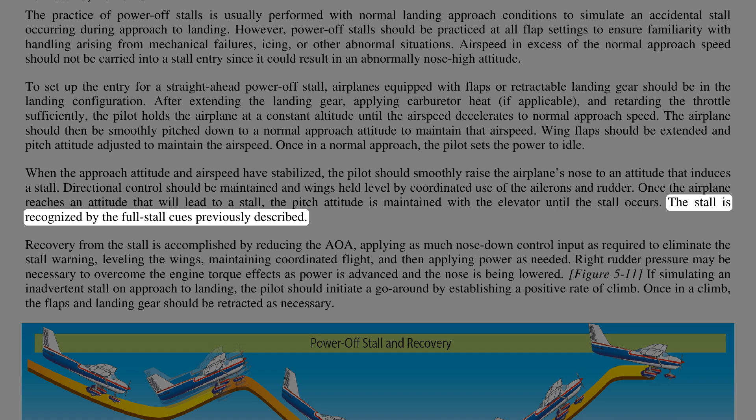Recovery from the stall is accomplished by reducing the angle of attack, applying as much nose-down control input as required to eliminate the stall warning, leveling the wings, maintaining coordinated flight, and then applying power as needed. Right rudder pressure may be necessary to overcome the engine torque effects as power is advanced and the nose is being lowered. Figure 5-11.

If simulating an inadvertent stall on approach to landing, the pilot should initiate a go-around by establishing a positive rate of climb. Once in a climb, the flaps and landing gear should be retracted as necessary.

Recovery from power-off stalls should also be practiced from shallow banked turns to simulate an inadvertent stall during a turn from base leg to final approach. During the practice of these stalls, the pilot should take care to ensure that the airplane remains coordinated and the turn continues at a constant bank angle until the full stall occurs.

If the airplane is allowed to slip, the outer wing may stall first and move downward abruptly. In a skid, the bank angle may increase further to a potentially dangerous attitude. The recovery procedure is the same, regardless of whether one wing rolls off first. The pilot should apply as much nose-down control input as necessary to eliminate the stall warning, level the wings with ailerons, coordinate with rudder, and add power as needed.

In the practice of turning stalls, no attempt should be made to stall or recover the airplane on a predetermined heading. However, to simulate a turn from base to final approach, the stall normally should be made to occur within a heading change of approximately 90 degrees.

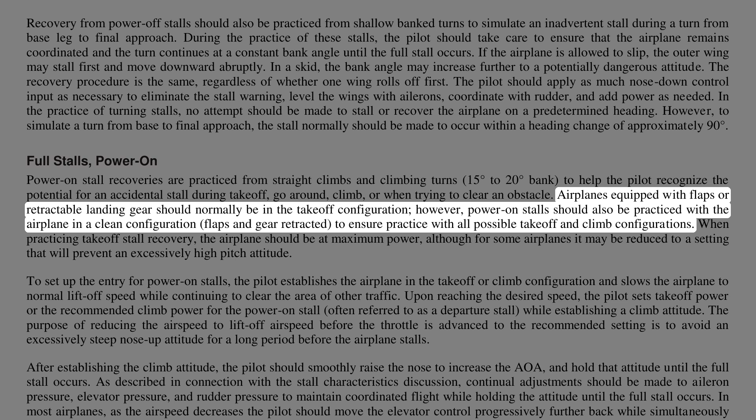Full stalls, power on. Power-on stall recoveries are practiced from straight climbs and climbing turns, 15 degrees to 20 degrees bank, to help the pilot recognize the potential for an accidental stall during takeoff, go-around, climb, or when trying to clear an obstacle. Airplanes equipped with flaps or retractable landing gear should normally be in the takeoff configuration. However, power-on stalls should also be practiced with the airplane in a clean configuration, flaps and gear retracted, to ensure practice with all possible takeoff and climb configurations.

When practicing takeoff stall recovery, the airplane should be at maximum power, although for some airplanes it may be reduced to a setting that will prevent an excessively high pitch attitude. To set up the entry for power-on stalls, the pilot establishes the airplane in the takeoff or climb configuration and slows the airplane to normal liftoff speed while continuing to clear the area of other traffic. Upon reaching the desired speed, the pilot sets takeoff power or the recommended climb power for the power-on stall, often referred to as a departure stall, while establishing a climb attitude.

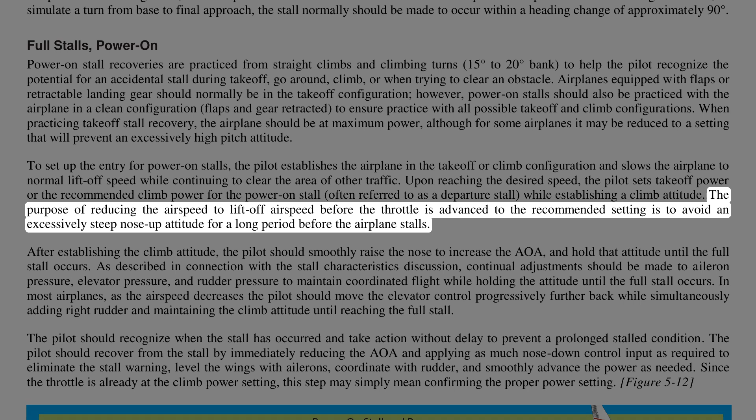The purpose of reducing the airspeed to liftoff airspeed before the throttle is advanced to the recommended setting is to avoid an excessively steep nose-up attitude for a long period before the airplane stalls. After establishing the climb attitude, the pilot should smoothly raise the nose to increase the angle of attack, and hold that attitude until the full stall occurs.

As described in connection with the stall characteristics discussion, continual adjustments should be made to aileron pressure, elevator pressure, and rudder pressure to maintain coordinated flight while holding the attitude until the full stall occurs. In most airplanes, as the airspeed decreases, the pilot should move the elevator control progressively further back while simultaneously adding right rudder and maintaining the climb attitude until reaching the full stall. The pilot should recognize when the stall has occurred and take action without delay to prevent a prolonged stalled condition.

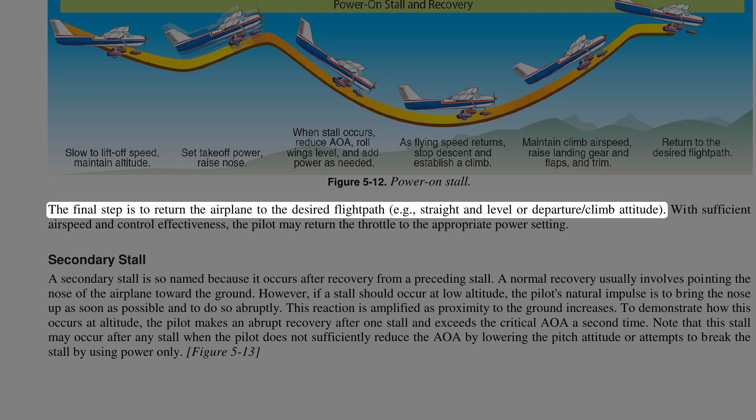The pilot should recover from the stall by immediately reducing the AOA and applying as much nose-down control input as required to eliminate the stall warning, level the wings with ailerons, coordinate with rudder, and smoothly advance the power as needed. Since the throttle is already at the climb power setting, this step may simply mean confirming the proper power setting. The final step is to return the airplane to the desired flight path, e.g., straight and level or departure climb attitude. With sufficient airspeed and control effectiveness, the pilot may return the throttle to the appropriate power setting.

A secondary stall is so named because it occurs after recovery from a preceding stall. A normal recovery usually involves pointing the nose of the airplane toward the ground. However, if a stall should occur at low altitude, the pilot's natural impulse is to bring the nose up as soon as possible and to do so abruptly. This reaction is amplified as proximity to the ground increases. To demonstrate how this occurs at altitude, the pilot makes an abrupt recovery after one stall and exceeds the critical AOA a second time. Note that this stall may occur after any stall when the pilot does not sufficiently reduce the AOA by lowering the pitch attitude, or attempts to break the stall by using power only.

If a secondary stall occurs, the pilot should again perform the stall recovery procedures by applying nose-down elevator pressure as required to eliminate the stall warning, level the wings with ailerons, coordinate with rudder, and adjust power as needed. When the airplane is no longer in a stalled condition, the pilot can return the airplane to the desired flight path. For pilot certification, this is a demonstration-only maneuver. Only flight instructor applicants may be required to perform it on a practical test.

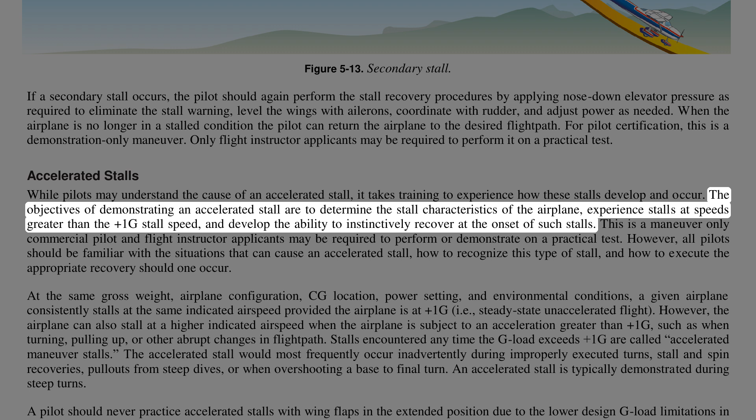Accelerated stalls. While pilots may understand the cause of an accelerated stall, it takes training to experience how these stalls develop and occur. The objectives of demonstrating an accelerated stall are to determine the stall characteristics of the airplane, experience stalls at speeds greater than the +1g stall speed, and develop the ability to instinctively recover at the onset of such stalls. This is a maneuver only commercial pilot and flight instructor applicants may be required to perform or demonstrate on a practical test. However, all pilots should be familiar with the situations that can cause an accelerated stall, how to recognize this type of stall, and how to execute the appropriate recovery should one occur.

At the same gross weight, airplane configuration, CG location, power setting, and environmental conditions, a given airplane consistently stalls at the same indicated airspeed provided the airplane is at +1g, i.e., steady state unaccelerated flight. However, the airplane can also stall at a higher indicated airspeed when subject to an acceleration greater than +1g, such as when turning, pulling up, or other abrupt changes in flight path. Stalls encountered any time the g load exceeds +1g are called accelerated maneuver stalls.

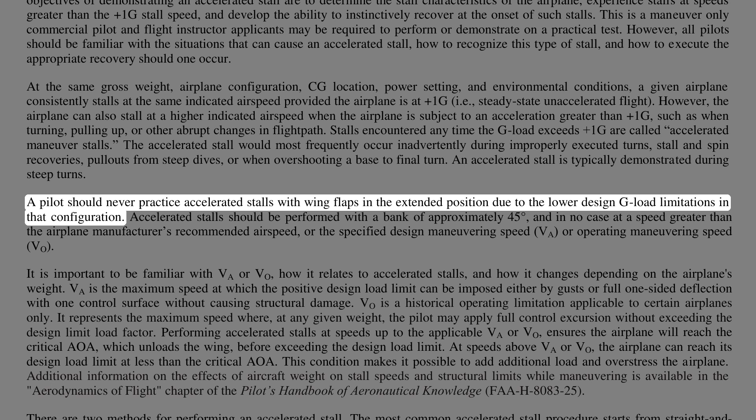The accelerated stall would most frequently occur inadvertently during improperly executed turns, stall and spin recoveries, pullouts from steep dives, or when overshooting a base to final turn. An accelerated stall is typically demonstrated during steep turns. A pilot should never practice accelerated stalls with wing flaps in the extended position due to the lower design G-load limitations in that configuration. Accelerated stalls should be performed with a bank of approximately 45 degrees, and in no case at a speed greater than the airplane manufacturer's recommended airspeed, or the specified design maneuvering speed, Va, or operating maneuvering speed, Vo. It is important to be familiar with Va or Vo, how it relates to accelerated stalls, and how it changes depending on the airplane's weight.

Va is the maximum speed at which the positive design load limit can be imposed, either by gusts or full one-sided deflection with one control surface, without causing structural damage. Vo is a historical operating limitation applicable to certain airplanes only. It represents the maximum speed where, at any given weight, the pilot may apply full control excursion without exceeding the design limit load factor. Performing accelerated stalls at speeds up to the applicable Va ensures the airplane will reach the critical AOA, which unloads the wing, before exceeding the design load limit. At speeds above Va, the airplane can reach its design load limit at less than the critical AOA. This condition makes it possible to add additional load and overstress the airplane.

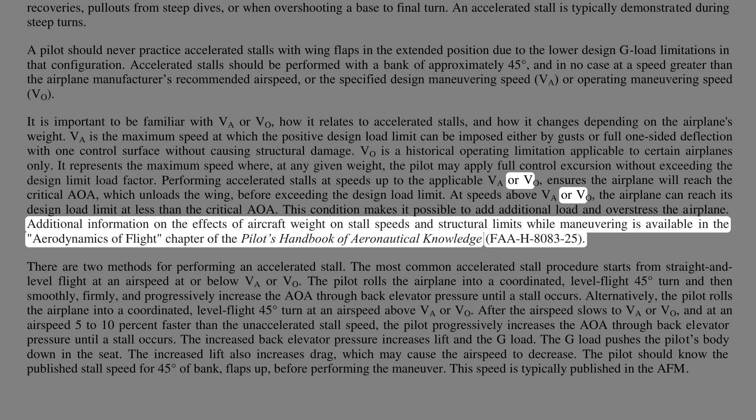Additional information on the effects of aircraft weight on stall speeds and structural limits while maneuvering is available in the Aerodynamics of Flight chapter of the Pilot's Handbook of Aeronautical Knowledge, FAA-H-8083-25.

An airplane typically stalls during a level, coordinated turn similar to the way it does in wings level flight, except that the stall buffet can be sharper. If the turn is coordinated at the time of the stall, the airplane's nose pitches away from the pilot just as it does in a wings level stall, since both wings will tend to stall nearly simultaneously.

If the airplane is not properly coordinated at the time of stall, the stall behavior may include a change in bank angle until the angle of attack has been reduced.

It is important to take recovery action at the first indication of a stall, if impending stall training or checking, or immediately after the stall has fully developed, if full stall training or checking, by applying forward elevator pressure as required to reduce the angle of attack and to eliminate the stall warning, level the wings using ailerons, coordinate with rudder, and adjust power as necessary.

Stalls that result from abrupt maneuvers tend to be more aggressive than unaccelerated plus one g stalls. Because they occur at higher than normal airspeeds or may occur at lower than anticipated pitch attitudes, they can surprise an inexperienced pilot. Since an accelerated stall may put the airplane in an unexpected attitude, failure to execute an immediate recovery may result in a spin or other departure from controlled flight.

Cross-control stall. The objective of the cross-control stall demonstration is to show the effects of uncoordinated flight on stall behavior and to emphasize the importance of maintaining coordinated flight while making turns.

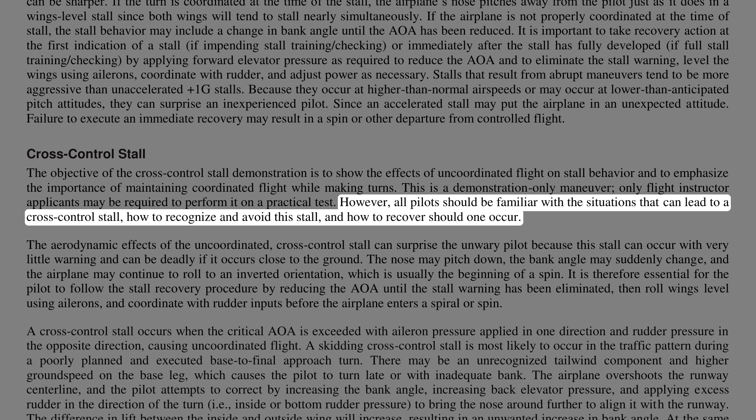This is a demonstration-only maneuver. Only flight instructor applicants may be required to perform it on a practical test. However, all pilots should be familiar with the situations that can lead to a cross-control stall, how to recognize and avoid this stall, and how to recover should one occur.

The aerodynamic effects of the uncoordinated cross-control stall can surprise the unwary pilot because this stall can occur with very little warning and can be deadly if it occurs close to the ground. The nose may pitch down, the bank angle may suddenly change, and the airplane may continue to roll to an inverted orientation, which is usually the beginning of a spin.

It is therefore essential for the pilot to follow the stall recovery procedure by reducing the angle of attack until the stall warning has been eliminated, then roll wings level using ailerons, and coordinate with rudder inputs before the airplane enters a spiral or spin.

A cross-control stall occurs when the critical angle of attack is exceeded with aileron pressure applied in one direction and rudder pressure in the opposite direction, causing uncoordinated flight.

A skidding cross-control stall is most likely to occur in the traffic pattern during a poorly planned and executed base-to-final approach turn. There may be an unrecognized tailwind component and higher ground speed on the base leg, which causes the pilot to turn late or with inadequate bank.

The airplane overshoots the runway centerline, and the pilot attempts to correct by increasing the bank angle, increasing back elevator pressure, and applying excess rudder in the direction of the turn, i.e., inside or bottom rudder pressure, to bring the nose around further to align it with the runway.

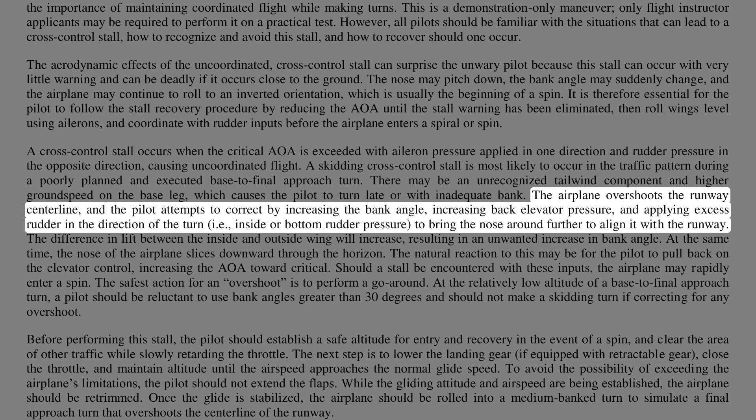The difference in lift between the inside and outside wing will increase, resulting in an unwanted increase in bank angle. At the same time, the nose of the airplane slices downward through the horizon. The natural reaction to this may be for the pilot to pull back on the elevator control, increasing the angle of attack toward critical. Should a stall be encountered with these inputs, the airplane may rapidly enter a spin.

The safest action for an overshoot is to perform a go-around. At the relatively low altitude of a base to final approach turn, a pilot should be reluctant to use bank angles greater than 30 degrees and should not make a skidding turn if correcting for any overshoot.

Before performing this stall, the pilot should establish a safe altitude for entry and recovery in the event of a spin, and clear the area of other traffic while slowly retarding the throttle.

The next step is to lower the landing gear, if equipped with retractable gear, close the throttle, and maintain altitude until the airspeed approaches the normal glide speed. To avoid the possibility of exceeding the airplane's limitations, the pilot should not extend the flaps.

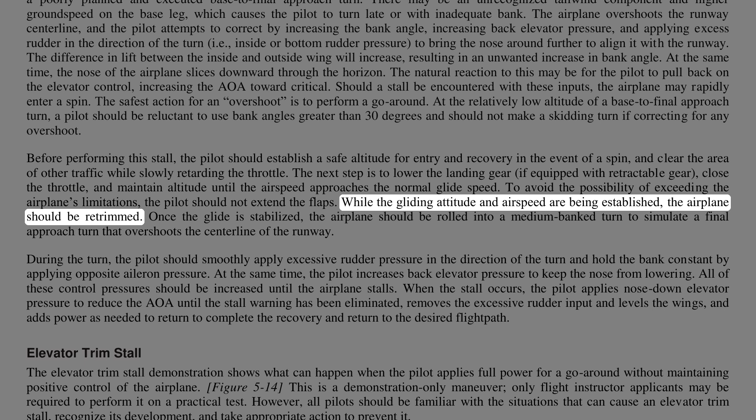While the gliding attitude and airspeed are being established, the airplane should be retrimmed. Once the glide is stabilized, the airplane should be rolled into a medium banked turn to simulate a final approach turn that overshoots the centerline of the runway.

During the turn, the pilot should smoothly apply excessive rudder pressure in the direction of the turn and hold the bank constant by applying opposite aileron pressure. At the same time, the pilot increases back elevator pressure to keep the nose from lowering. All of these control pressures should be increased until the airplane stalls.

When the stall occurs, the pilot applies nose-down elevator pressure to reduce the angle of attack until the stall warning has been eliminated, removes the excessive rudder input and levels the wings, and adds power as needed to complete the recovery and return to the desired flight path.

Elevator trim stall. The elevator trim stall demonstration shows what can happen when the pilot applies full power for a go-around without maintaining positive control of the airplane. Figure 5-14. This is a demonstration-only maneuver. Only flight instructor applicants may be required to perform it on a practical test. However, all pilots should be familiar with the situations that can cause an elevator trim stall, recognize its development, and take appropriate action to prevent it.

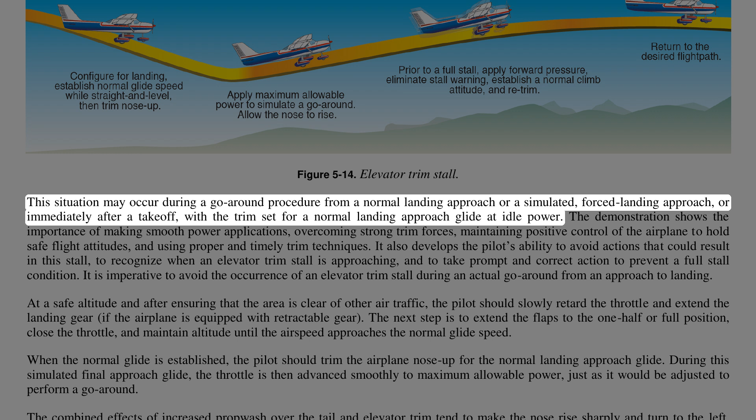This situation may occur during a go-around procedure from a normal landing approach, a simulated forced landing approach, or immediately after a takeoff, with the trim set for a normal landing approach glide at idle power. The demonstration shows the importance of making smooth power applications, overcoming strong trim forces, maintaining positive control of the airplane to hold safe flight attitudes, and using proper and timely trim techniques. It also develops the pilot's ability to avoid actions that could result in this stall, to recognize when an elevator trim stall is approaching, and to take prompt and correct action to prevent a full stall condition.

It is imperative to avoid the occurrence of an elevator trim stall during an actual go-around from an approach to landing. At a safe altitude and after ensuring the area is clear of other air traffic, the pilot should slowly retard the throttle and extend the landing gear, if the airplane is equipped with retractable gear. The next step is to extend the flaps to the half or full position, close the throttle, and maintain altitude until the airspeed approaches the normal glide speed. When the normal glide is established, the pilot should trim the airplane nose up for the normal landing approach glide.

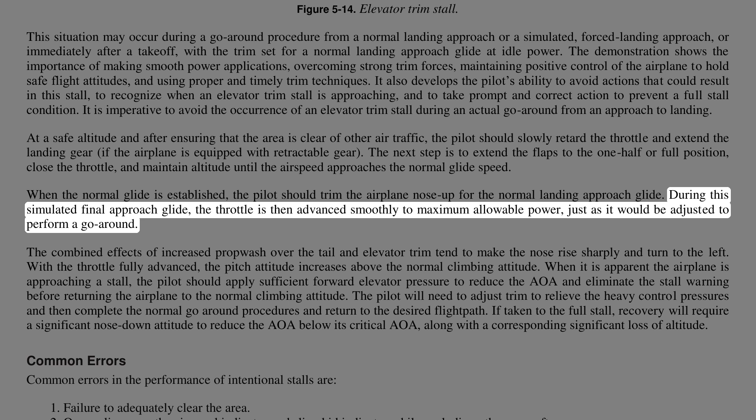During this simulated final approach glide, the throttle is then advanced smoothly to maximum allowable power, just as it would be adjusted to perform a go-around. The combined effects of increased prop wash over the tail and elevator trim tend to make the nose rise sharply and turn to the left. With the throttle fully advanced, the pitch attitude increases above the normal climbing attitude.

When it is apparent the airplane is approaching a stall, the pilot should apply sufficient forward elevator pressure to reduce the angle of attack and eliminate the stall warning before returning the airplane to the normal climbing attitude. The pilot will need to adjust trim to relieve the heavy control pressures and then complete the normal go-around procedures and return to the desired flight path.

If taken to the full stall, recovery will require a significant nose-down attitude to reduce the angle of attack below its critical angle of attack, along with a corresponding significant loss of altitude. Common errors.

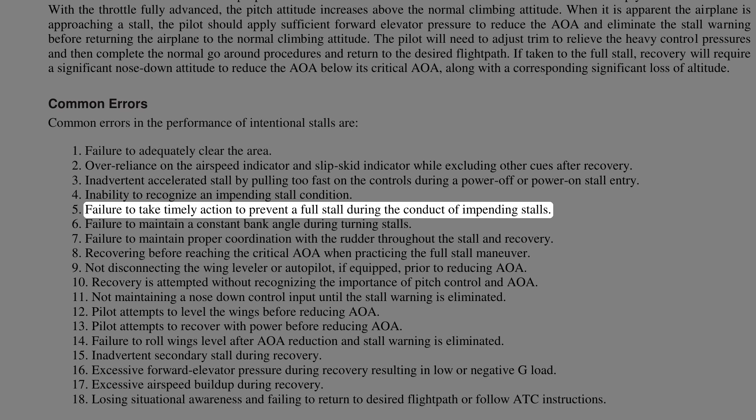Common errors in the performance of intentional stalls are failure to adequately clear the area, over-reliance on the airspeed indicator and slip-skid indicator while excluding other cues after recovery, inadvertent accelerated stall by pulling too fast on the controls during a power-off or power-on stall entry, inability to recognize an impending stall condition, failure to take timely action to prevent a full stall during the conduct of impending stalls, failure to maintain a constant bank angle during turning stalls, failure to maintain proper coordination with the rudder throughout the stall and recovery, recovering before reaching the critical angle of attack when practicing the full stall maneuver, and not disconnecting the wing leveler or autopilot, if equipped, prior to reducing angle of attack.

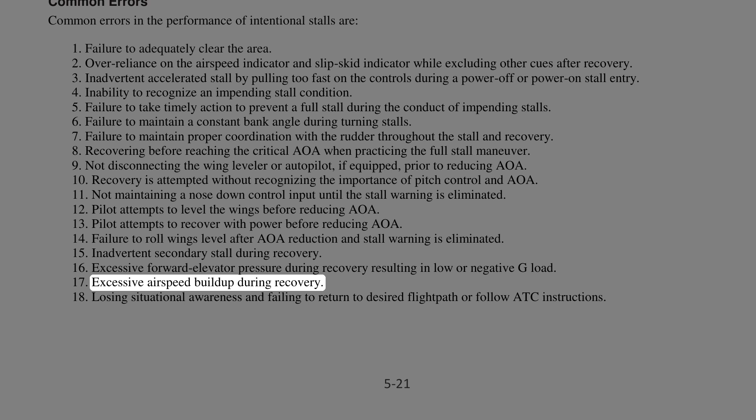Recovery is attempted without recognizing the importance of pitch control and angle of attack. Not maintaining a nose-down control input until the stall warning is eliminated. Pilot attempts to level the wings before reducing angle of attack. Pilot attempts to recover with power before reducing angle of attack. Failure to roll wings level after angle of attack reduction and stall warning is eliminated. Inadvertent secondary stall during recovery. Excessive forward elevator pressure during recovery resulting in low or negative G load. Excessive airspeed buildup during recovery. Losing situational awareness and failing to return to desired flight path or follow ATC instructions.

Spin awareness. A spin is an aggravated stall condition that may result after a stall occurs. Mishandling of yaw control during a stall increases the likelihood of a spin entry. A spin results in the airplane following a downward corkscrew path.

During a spin, the airplane rotates around its vertical axis affected by different lift and drag forces on each wing, and the airplane descends due to gravity, rolling, yawing, and pitching in a spiral path. There are different types of spins. The spin type or types that occur in a particular airplane may be determined by airplane design, loading, control inputs, and density altitude. In all spins, at least one of the wings is stalled.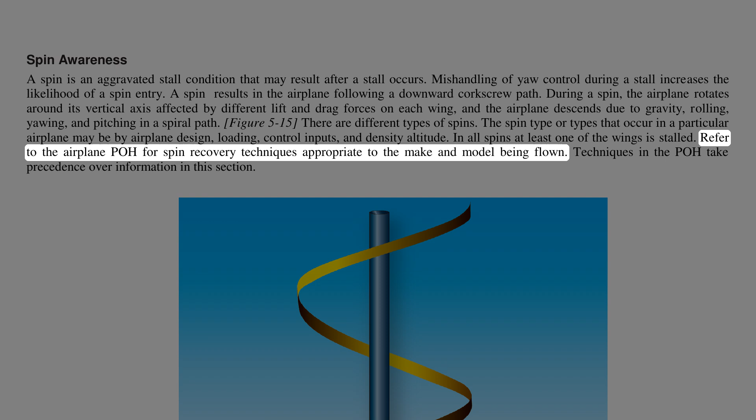Refer to the airplane POH for spin recovery techniques appropriate to the make and model being flown. Techniques in the POH take precedence over information in this section.

A spin occurs when at least one of the airplane's wings exceeds the critical angle of attack, stalling, with a sideslip or yaw acting on the airplane at or beyond the actual stall. An airplane will yaw not only because of incorrect rudder application but also because of adverse yaw created by aileron deflection, engine and prop effects including P-factor, torque, spiraling slipstream, and gyroscopic precession, and wind shear including wake turbulence.

If the yaw had been created by the pilot because of incorrect rudder use, the pilot may not be aware that a critical angle of attack has been exceeded until the airplane yaws out of control toward the lowering wing. A stall that occurs while the airplane is in a slipping or skidding turn can result in a spin entry and rotation in the direction of rudder application, regardless of which wingtip is raised.

If the pilot does not immediately initiate stall recovery, the airplane may enter a spin. Maintaining directional control and not allowing the nose to yaw before stall recovery is initiated is key to averting a spin. The pilot should apply the correct amount of rudder to keep the nose from yawing and the wings from banking. Modern airplanes tend to be more reluctant to spin compared to older designs, however it is not impossible for them to spin. Mishandling the controls in turns, stalls, and in uncoordinated slow flight can put even the most reluctant airplanes into an accidental spin.

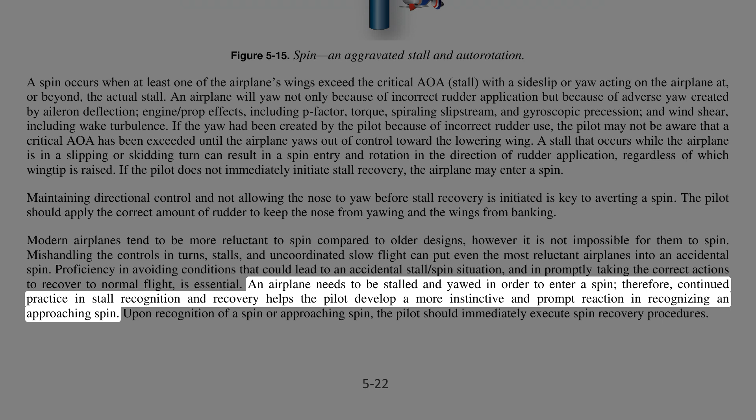Proficiency in avoiding conditions that could lead to an accidental stall-spin situation, and in promptly taking the correct actions to recover to normal flight, is essential. An airplane needs to be stalled and yawed in order to enter a spin. Therefore, continued practice in stall recognition and recovery helps the pilot develop a more instinctive and prompt reaction in recognizing an approaching spin. Upon recognition of a spin or approaching spin, the pilot should immediately execute spin recovery procedures.

Spin procedures: the first rule for spin demonstration is to ensure that the airplane is approved for spins. Please note that this discussion addresses generic spin procedures. It does not cover special spin procedures or techniques required for a particular airplane. Safety dictates careful review of the AFM, POH, and regulations before attempting spins in any airplane.

The review should include the following items: the airplane's AFM or POH limitations section, placards, or type certification data to determine if the airplane is approved for spins; weight and balance limitations; recommended entry and recovery procedures; and the current 14 CFR Part 91 parachute requirements.

Also essential is a thorough airplane pre-flight inspection, with special emphasis on excess or loose items that may affect the weight, CG, and controllability of the airplane. It is also important to ensure that the airplane is within any CG limitations as determined by the manufacturer. Slack or loose control cables, particularly rudder and elevator, could prevent full anti-spin control deflections and delay or preclude recovery in some airplanes.

Prior to any intentional spin, clear the flight area above and below the airplane for other traffic. This task may occur while slowing the airplane for the spin entry. In addition, all spins should begin at an altitude high enough to complete recovery at or above 1,500 feet AGL. Note that the first turn in a spin results in an altitude loss of approximately 1,000 feet, while each subsequent turn loses about half that amount.

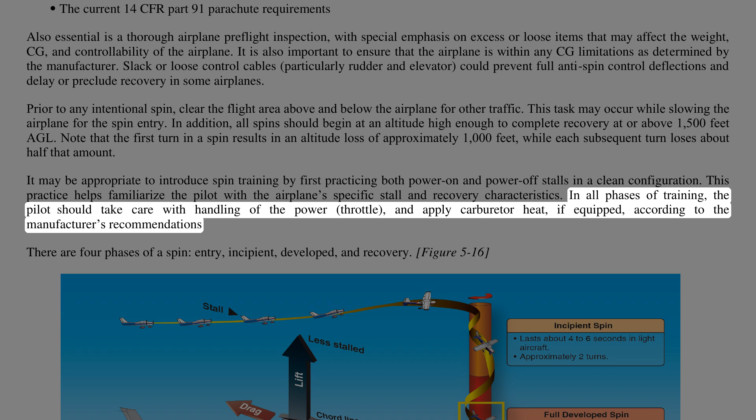There are four phases of a spin: entry, incipient, developed, and recovery. In the entry phase, the pilot intentionally or accidentally provides the necessary elements for the spin. The entry procedure for demonstrating a spin is similar to a power-off stall.

During the entry, the pilot should slowly reduce power to idle while simultaneously raising the nose to a pitch attitude that ensures a stall. As the airplane approaches a stall, the pilot smoothly applies full rudder in the direction of the desired spin rotation while applying full back, up elevator to the limit of travel. Unless the AFM/POH specifies otherwise, ailerons are maintained in the neutral position during the spin procedure.

Incipient phase: this occurs from the time the airplane stalls and starts rotating until the spin has fully developed. This phase may take 2 to 4 turns for most airplanes. In this phase, the aerodynamic and inertial forces have not achieved a balance.

As the incipient phase develops, the indicated airspeed will generally stabilize at a low and constant airspeed, and the symbolic airplane of the turn indicator should indicate the direction of the spin. The pilot should not use the slip/skid ball inclinometer to determine spin direction. The location of the instrument in the airplane determines how the ball will move, rather than the direction of the spin. For example, a ball mounted on the left side of the airplane will always move to the left, even in a spin with rotation to the right.

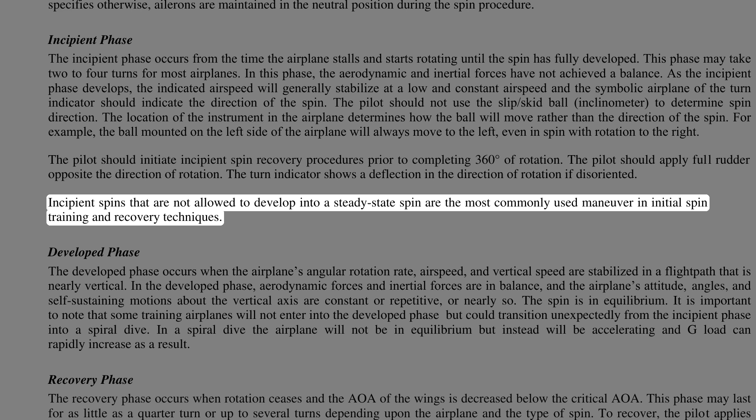The pilot should initiate incipient spin recovery procedures prior to completing 360 degrees of rotation, applying full rudder opposite the direction of rotation. The turn indicator shows a deflection in the direction of rotation if disoriented. Incipient spins that are not allowed to develop into a steady-state spin are the most commonly used maneuver in initial spin training and recovery techniques.

Developed phase: this occurs when the airplane's angular rotation rate, airspeed, and vertical speed are stabilized in a flight path that is nearly vertical. In the developed phase, aerodynamic forces and inertial forces are in balance, and the airplane's attitude, angles, and self-sustaining motions about the vertical axis are constant or repetitive, or nearly so. The spin is in equilibrium.

It's important to note that some training airplanes will not enter the developed phase, but could transition unexpectedly from the incipient phase into a spiral dive. In a spiral dive, the airplane will not be in equilibrium but instead will be accelerating, and G-load can rapidly increase as a result.

Recovery phase: this occurs when rotation ceases and the angle of attack of the wings is decreased below the critical angle of attack. This phase may last for as little as a quarter turn or up to several turns, depending upon the airplane and the type of spin. To recover, the pilot applies control inputs to disrupt the spin equilibrium by stopping the rotation and unstalling the wing.

To accomplish spin recovery, the pilot should always follow the manufacturer's recommended procedures. In the absence of manufacturer's recommended spin recovery procedures and techniques, use the 6-step spin recovery procedure in Figure 5-17. If flaps and/or retractable landing gear are extended prior to the spin, they should be retracted as soon as practicable after spin entry. The following discussion explains each of the 6 steps a pilot should follow for spin recovery.

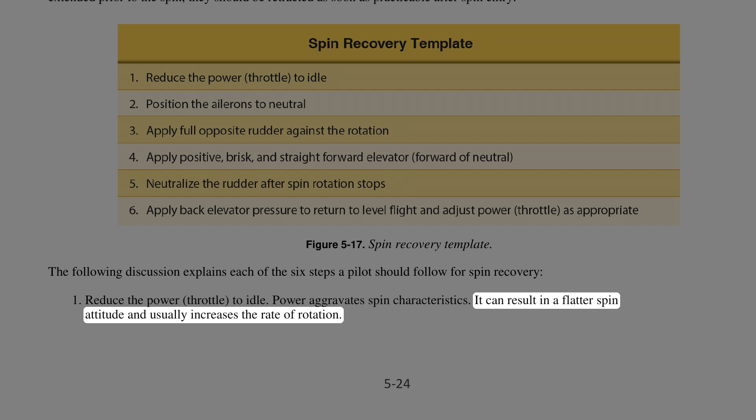Reduce the power, throttle, to idle. Power aggravates spin characteristics. It can result in a flatter spin attitude and usually increases the rate of rotation.

Position the ailerons to neutral. Ailerons may have an adverse effect on spin recovery. Aileron control in the direction of the spin may accelerate the rate of rotation, steepen the spin attitude, and delay the recovery. Aileron control opposite the direction of the spin may cause flattening of the spin attitude and delayed recovery, or may even be responsible for causing an unrecoverable spin. The best procedure is to ensure that the ailerons are neutral.

Apply and hold full opposite rudder against the rotation until the rotation stops. Rudder tends to be the most important control for recovery in typical single-engine airplanes, and its application should be brisk and full, opposite to the direction of rotation. Avoid slow and overly cautious opposite rudder movement during spin recovery, which can allow the airplane to spin indefinitely, even with anti-spin inputs. A brisk and positive technique results in a more positive spin recovery.

Apply positive, brisk, and straightforward elevator, forward of neutral. This step should be taken immediately after full rudder application. Do not wait for the rotation to stop before performing this step. The forceful movement of the elevator decreases the angle of attack and drives the airplane toward unstalled flight. In some cases, full forward elevator may be required for recovery. Hold the controls firmly in these positions until the spinning stops. Note: if the airspeed is increasing, the airplane is no longer in a spin.

In a spin, the airplane is stalled, and the indicated airspeed should therefore be relatively low and constant and should not be accelerating. Neutralize the rudder after spin rotation stops. Failure to neutralize the rudder at this time, when airspeed is increasing, causes a yawing or side-slipping effect.

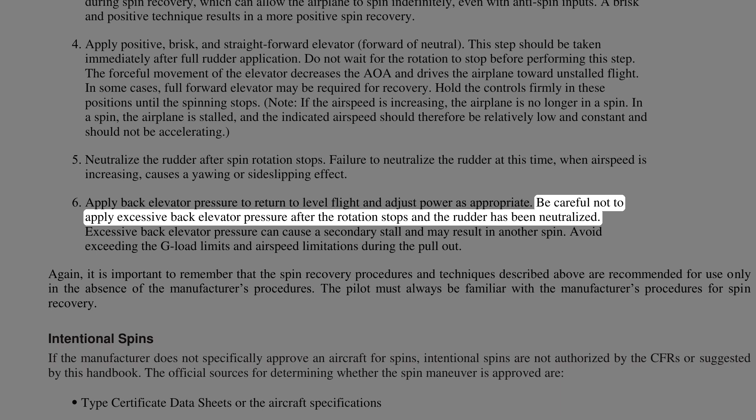Apply back elevator pressure to return to level flight and adjust power as appropriate. Be careful not to apply excessive back elevator pressure after the rotation stops and the rudder has been neutralized. Excessive back elevator pressure can cause a secondary stall and may result in another spin. Avoid exceeding the G load limits and airspeed limitations during the pull-out.

Again, it is important to remember that the spin recovery procedures and techniques described above are recommended for use only in the absence of the manufacturer's procedures. The pilot must always be familiar with the manufacturer's procedures for spin recovery.

Intentional spins. If the manufacturer does not specifically approve an aircraft for spins, intentional spins are not authorized by the CFRs or suggested by this handbook. The official sources for determining whether the spin maneuver is approved are Type Certificate Data Sheets or the Aircraft Specifications, the Limitations section of the FAA-approved AFM-POH regarding and limiting gross weight, CG range, or amount of fuel, or on a placard located in clear view of the pilot in the airplane, e.g., no acrobatic maneuvers including spins approved.

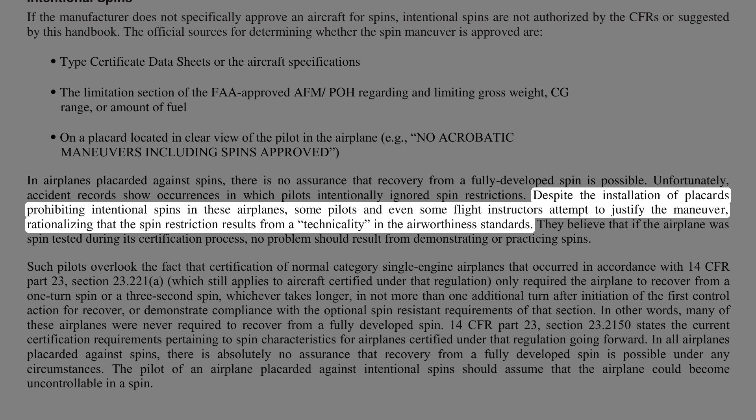In airplanes placarded against spins, there is no assurance that recovery from a fully developed spin is possible. Unfortunately, accident records show occurrences in which pilots intentionally ignored spin restrictions. Despite the installation of placards prohibiting intentional spins in these airplanes, some pilots and even some flight instructors attempt to justify the maneuver, rationalizing that the spin restriction results from a technicality in the airworthiness standards. They believe that if the airplane was spin tested during its certification process, no problem should result from demonstrating or practicing spins. Such pilots overlook the fact that certification of normal category single-engine airplanes that occurred in accordance with 14 CFR Part 23, Section...

23.221a, which still applies to aircraft certified under that regulation, only required the airplane to recover from a one-turn spin or a 3-second spin, whichever takes longer, in not more than one additional turn after initiation of the first control action for recovery, or demonstrate compliance with the optional spin-resistant requirements of that section. In other words, many of these airplanes were never required to recover from a fully developed spin.

14 CFR Part 23, Section 23.2150 states the current certification requirements pertaining to spin characteristics for airplanes certified under that regulation going forward. In all airplanes placarded against spins, there is absolutely no assurance that recovery from a fully developed spin is possible under any circumstances. The pilot of an airplane placarded against intentional spins should assume that the airplane could become uncontrollable in a spin.

Weight and balance requirement related to spins. In airplanes that are approved for spins, compliance with weight and balance requirements is important for safe performance and recovery from the spin maneuver. Pilots should know that even minor weight or balance changes can affect the airplane's spin recovery characteristics. Such changes can either degrade or enhance the spin maneuver and/or recovery characteristics.

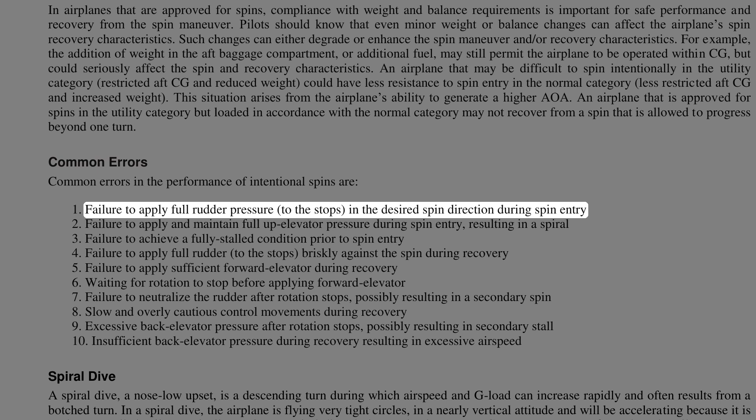Common errors. Common errors in the performance of intentional spins are: failure to apply full rudder pressure to the stops in the desired spin direction during spin entry; failure to apply and maintain full up elevator pressure during spin entry, resulting in a spiral; failure to achieve a fully stalled condition prior to spin entry; failure to apply full rudder to the stops briskly against the spin during recovery; failure to apply sufficient forward elevator during recovery, waiting for rotation to stop before applying forward elevator; failure to neutralize the rudder after rotation stops, possibly resulting in a secondary spin; slow and overly cautious control movements during recovery; excessive back elevator pressure after rotation stops, possibly resulting in secondary stall; insufficient back elevator pressure during recovery resulting in excessive airspeed.

Spiral dive. A spiral dive, a nose-low upset, is a descending turn during which airspeed and G-load can increase rapidly and often results from a botched turn.

In a spiral dive, the airplane is flying very tight circles in a nearly vertical attitude and will be accelerating because it is no longer stalled.

Pilots typically get into a spiral dive during an inadvertent IMC encounter, most often when the pilot relies on kinesthetic sensations rather than on the flight instruments. A pilot distracted by other sensations can easily enter a slightly nose-low, wing-low, descending turn and, at least initially, fail to recognize this error. Especially in IMC, it may be only the sound of increasing speed that makes the pilot aware of the rapidly developing situation.

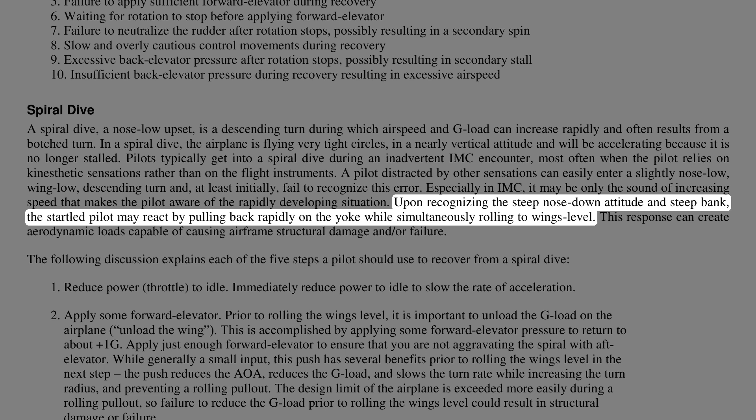Upon recognizing the steep nose-down attitude and steep bank, the startled pilot may react by pulling back rapidly on the yoke while simultaneously rolling to wings level. This response can create aerodynamic loads capable of causing airframe structural damage and/or failure.

The following discussion explains each of the 5 steps a pilot should use to recover from a spiral dive. Step one: reduce power, throttle, to idle. Immediately reduce power to idle to slow the rate of acceleration.

Apply some forward elevator. Prior to rolling the wings level, it is important to unload the G-load on the airplane, unload the wing. This is accomplished by applying some forward elevator pressure to return to about +1 G. Apply just enough forward elevator to ensure that you are not aggravating the spiral with aft elevator. While generally a small input, this push has several benefits prior to rolling the wings level in the next step.

The push reduces the AOA, reduces the G-load, and slows the turn rate while increasing the turn radius and preventing a rolling pullout. The design limit of the airplane is exceeded more easily during a rolling pullout, so failure to reduce the G-load prior to rolling the wings level could result in structural damage or failure.

Roll to wings level using coordinated aileron and rudder inputs. Even though the airplane is in a nose-low attitude, continue the roll until the wings are completely level again before performing step 4, gently raise the nose to level flight.

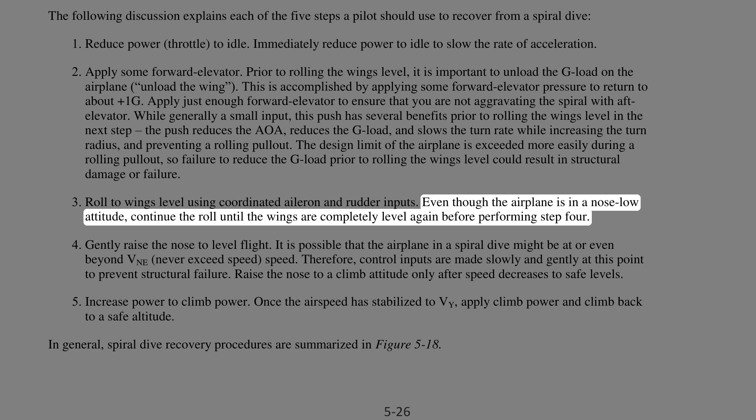It is possible that the airplane in a spiral dive might be at or even beyond VNE, never exceed speed. Therefore, control inputs are made slowly and gently at this point to prevent structural failure. Raise the nose to a climb attitude only after speed decreases to safe levels.

Increase power to climb power. Once the airspeed has stabilized to Vy, apply climb power and climb back to a safe altitude. In general, spiral dive recovery procedures are summarized in Figure 5-18.

Common errors in the recovery from spiral dives are failure to reduce power first, mistakenly adding power, attempting to pull out of dive without rolling wings level, simultaneously pulling out of dive while rolling wings level, not unloading the Gs prior to rolling level, and not adding power once climb is established.

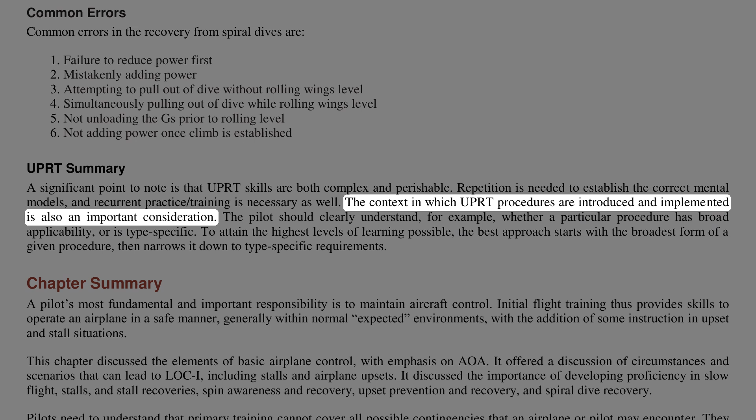UPRT Summary. A significant point to note is that UPRT skills are both complex and perishable. Repetition is needed to establish the correct mental models, and recurrent practice and training is necessary as well. The context in which UPRT procedures are introduced and implemented is also an important consideration. The pilot should clearly understand, for example, whether a particular procedure has broad applicability or is type-specific. To attain the highest levels of learning possible, the best approach starts with the broadest form of a given procedure, then narrows it down to type-specific requirements.

Chapter Summary. A pilot's most fundamental and important responsibility is to maintain aircraft control. Initial flight training thus provides skills to operate an airplane in a safe manner, generally within normal, expected environments, with the addition of some instruction in upset and stall situations. This chapter discussed the elements of basic airplane control, with emphasis on AOA. It offered a discussion of circumstances and scenarios that can lead to LOC-I, including stalls and airplane upsets.

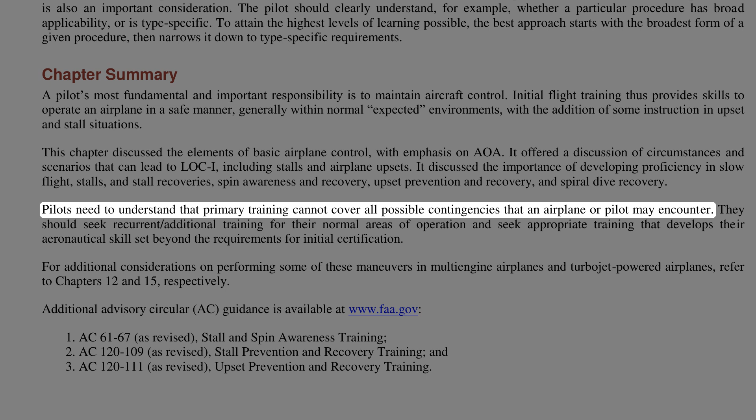It discussed the importance of developing proficiency in slow flight, stalls, and stall recoveries, spin awareness and recovery, upset prevention and recovery, and spiral dive recovery. Pilots need to understand that primary training cannot cover all possible contingencies that an airplane or pilot may encounter. They should seek recurrent, additional training for their normal areas of operation and seek appropriate training that develops their aeronautical skills set beyond the requirements for initial certification.

For additional considerations on performing some of these maneuvers in multi-engine airplanes and turbojet-powered airplanes, refer to chapters 12 and 15, respectively. Additional advisory circular, AC, guidance is available at AC 61-67, as revised, stall and spin awareness training; AC 120-109, as revised, stall prevention and recovery training; and AC 120-111, as revised, upset prevention and recovery training.